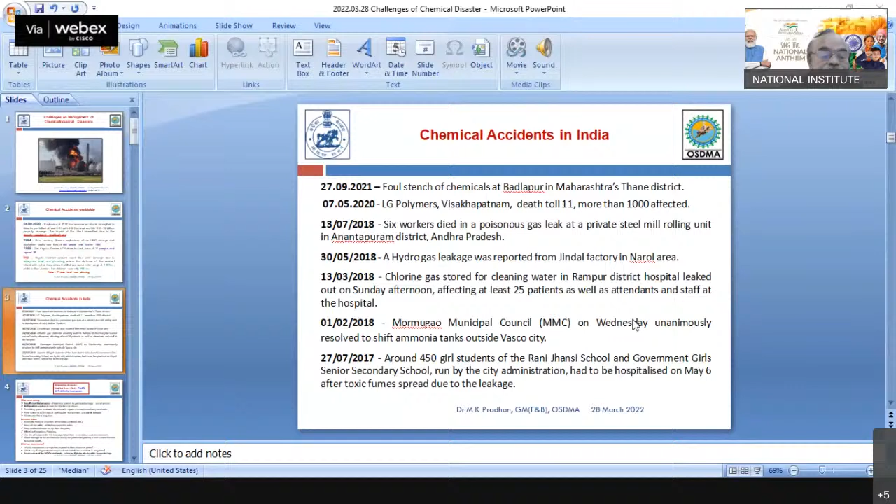So, sir, my presentation is visible, sir? Yes, sir, it is visible. Yes, sir. Thank you. You can zoom it, sir. Zoom कर देना वो. This one. Sir, it is visible, sir. Hello, sir. Yes, sir. It is visible and audible. Sir, slides are moving, na? Slides are moving. Yes, sir. It is moving nicely. Thank you, thank you, thank you.

So let me start with the chemical accidents worldwide. On 4th of August 2020, there was a massive explosion of around 2,750 tons of ammonium nitrate stockpiled in Beirut port, which killed at least 181 with 6,000 injured, and 10 to 15 billion US dollars of property was damaged. The impact of the blast intensified due to the densely populated neighborhood. I underline the words densely populated neighborhood, which caused more damage to the people.

Now coming to two other statistics, in 1984, there was an explosion in San Juanico, Mexico, when an LPG storage and distribution facility took the lives of 500 people and injured 7,000. But in 1966, in a similar LPG disaster which took place in France, the lives lost were only 17 and injured were 80.

Now, let me draw a basic correlation between the two major incidents which have taken place during the last 35 years. One, the Bhopal gas tragedy, which took place in 1984. Another, I will speak about the Vizag gas leak, which took place in May 2020, so after 35 years. Now let us see what is the main cause of the Bhopal gas disaster.

I hope everybody is quite aware of this, but in short, insufficient maintenance. Protective systems to prevent discharge were out of service. The refrigeration system to cool the reactor was down. The scrubbing system to absorb the released vapor was not immediately available. The flare system to burn vapors getting past the scrubber was out of service and unattended for a long time.

And what are the lessons learned? That we must eliminate or reduce the inventory of hazardous material. The inventory of hazardous material should be kept as low as possible, but it should be sufficient so that there will be continuous manufacturing. But we should not stock much, because the more the quantity, the more the hazard.

Keep all safety related equipment in order. We must see at regular intervals, through plant safety audits and regular inspections, that all the safety gadgets which are inbuilt, mounted or fitted to the equipment are in order.

Keep residential areas away from the plant. Many times, in chemical industries, the people with their families stay very close to the industry. So in case of a major gas leakage, there is a likely chance that even the families will also be put to problems.

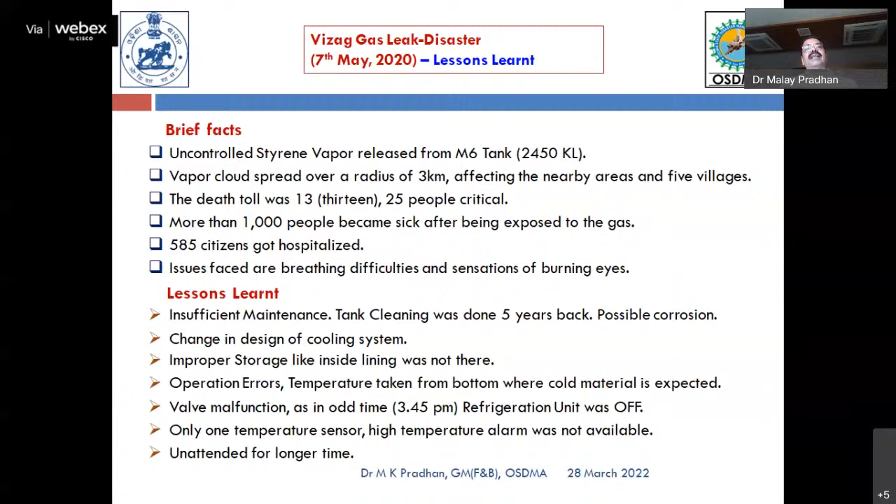Now, coming to the basic definitions, a chemical disaster is the unintentional release of one or more hazardous substances which could harm human health and the environment. So this is an unintentional release. Nobody wants it to be released, but it gets released of its own. And in the process, it can cause damage to human health and the environment.

Now coming to the chemical hazards. Chemical hazards are systems where chemical accidents could occur under certain circumstances. So it is the responsibility of the authority or the management of any chemical installation to identify the chemical hazards, meaning where in the system there is a chance of chemical accidents. And only after identification of the chemical hazards will the precautionary measures start flowing.

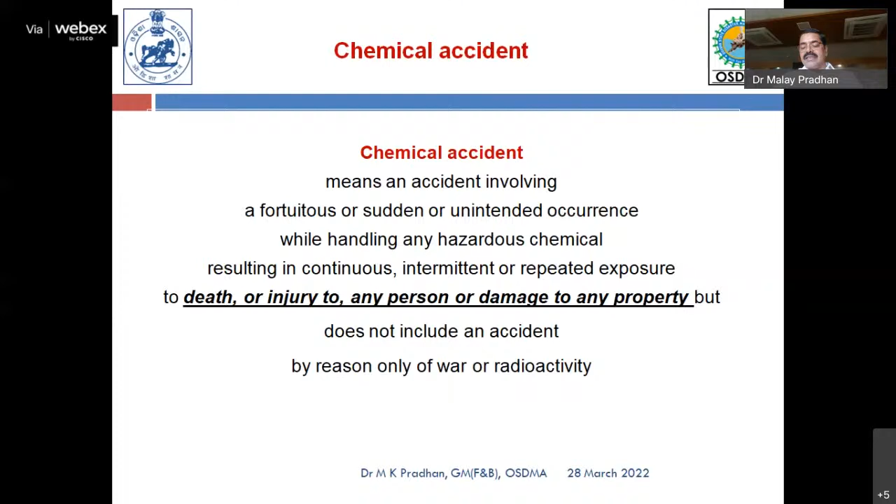Now, chemical accident. Chemical accident means an accident involving a fortuitous or sudden or unintended occurrence while handling any hazardous chemical, resulting in continuous, intermittent, or repeated exposure to death, injury to any person, or damage to any property. So, this is the basic definition of chemical accidents. Now, let us see how chemical accidents originate. These chemical accidents may originate in a manufacturing or formulation facility, a facility where these chemicals are being manufactured or formulated.

Formulated means one or more chemicals mixed in a certain proportion and converted into a different proportion, or used in a manufacturing process where hazardous chemicals are used as raw material. This is called a manufacturing or formulation facility.

During the process of operation, at any stage of the product cycle - even storing the hazardous chemical, pumping it from the storage point to the system through pipelines, and using the chemicals in processes - there is a chance of leakage because things are moving at speed and at a pressure more than atmospheric pressure. In case of leakage, it has a hazardous effect and can cause injury.

Another factor is material handling. This may be inside the plant or outside. Material handling from one point to another can also lead to problems.

Then there is transportation of hazardous chemicals, HAZChem. This transportation is very vital, and it can be on road, rail, air, water, or underground pipelines. As you see on the national highway, you might see a lot of LPG tankers, petrol, diesel, butane, and propane tankers moving.

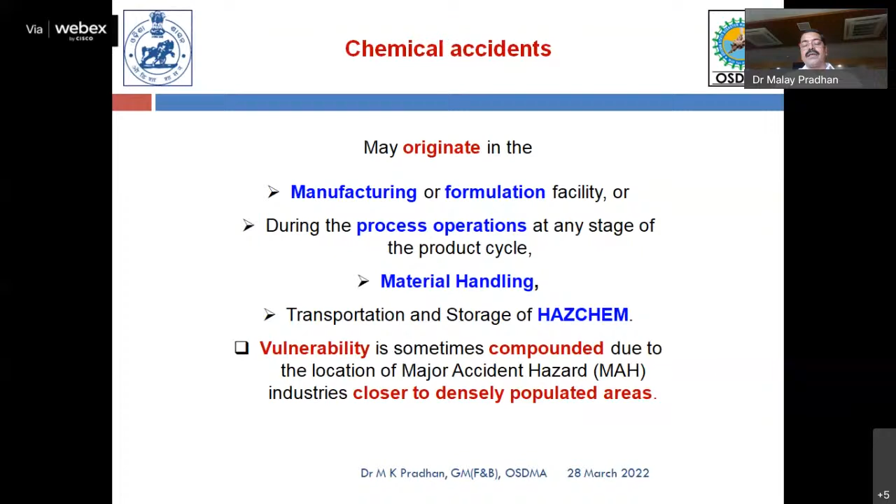The causative factors of chemical accidents can be in the shape of a fire, an explosion, a toxic release like ammonia or chlorine poisoning, or CO poisoning in blast furnaces or sponge iron plants. There can also be a combination of these - sometimes a toxic release can lead to a fire, or a fire can lead to an explosion, and cascading effects are also possible, where in one industry fire can spread across different zones, or fire from one industry can travel to other industries.

There are certain technical errors, such as design fatigue and corrosion, and human errors like procedure deviation. Many people who are at the helm of affairs, who are required to do the job, sometimes make procedural deviations, neglect safety instructions, or lack information. Organizational errors, like poor emergency planning, also sometimes lead to problems.

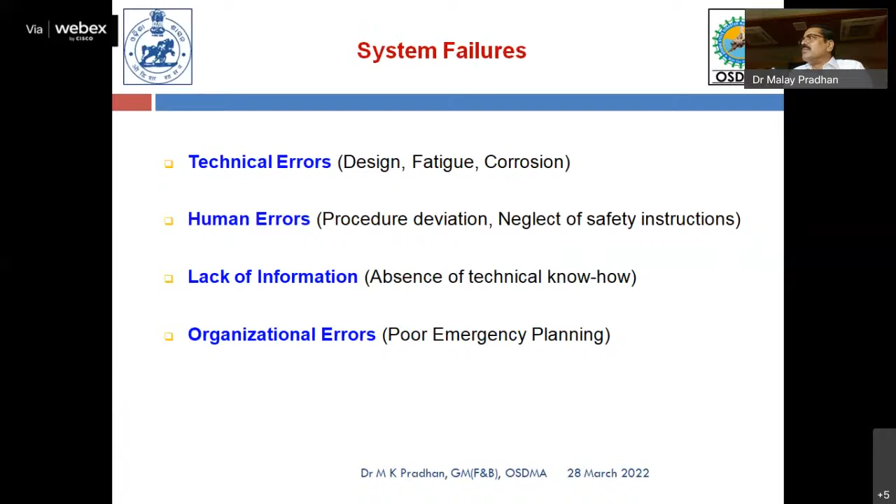The compounding effects of chemical accidents: the intensity becomes greater depending on wind speed and direction. Depending on the wind direction, the vulnerability zone will increase - instead of an entire circle, only a sector will be affected depending on wind direction and speed.

Then the rate of precipitation, toxicity, or the quantity of chemical released is also very important, as is the population in the reach of the release - how many people are available in that reach. Dense population creates more problems, along with the probability of formation of a lethal mixture and other industrial activity being performed in closer vicinity.

So a cascading effect can also take place. Now coming to disaster risk reduction, DRR. It is defined as the concept and practice of reducing disaster risks through systematic efforts to analyze and manage the causal factors of disaster through reduced exposure to hazards.

Once we identify the hazards, we will try to see that the exposure to the hazard is reduced. Less and less people will be exposed to the hazards. We will give some barriers or isolate the system from the main source so that fewer people will be exposed to this. This is one of the systems.

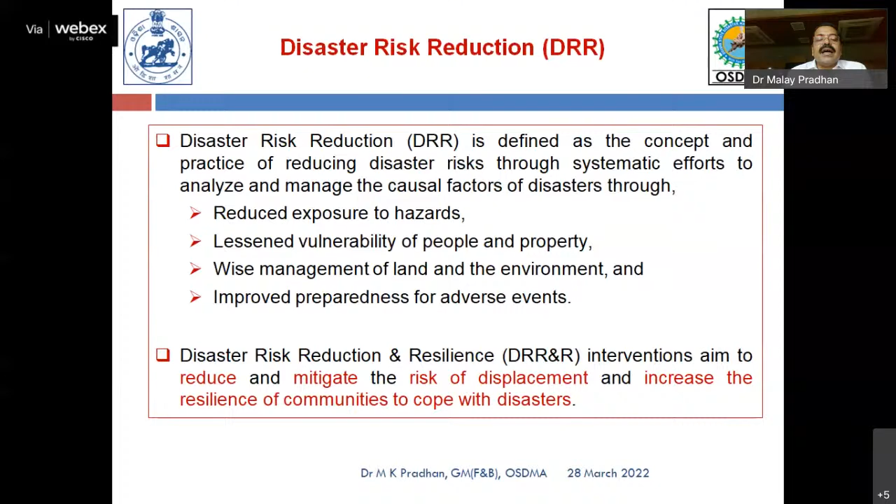So in a coastal area, even if industries are there, we must understand that because of cyclones, the wind speed can go up to 200 km/h. So whatever building structures, chimneys, or high-rise structures are available in the factories, we must ensure that the minimum resistance of the structures is more than the maximum permissible wind velocity at that particular point over the last 10 or 20 years. Then we can say that the structures or buildings are resilient.

The next point is a good warning system to save lives, prevent injuries, and mitigate losses. In cyclones, we can know the path maybe a minimum of 3, 4, 5 days or even a week before. We can know the path it is going to move and the maximum speed it can reach.

But coming to a chemical accident, suppose ammonia is being stored in one vessel or storage device. When it leaks, giving a warning becomes very difficult. So the intensity of chemical accidents is definitely more, but the frequency is less, and we hardly get any warning system.

The only warning system we must see is whatever the parameters, be it pressure, temperature, flow velocity, or thickness—corrosion, etc. We must have good sensitization systems so that when pressure is becoming more, a warning will come. Because in a chemical accident, we simply cannot allow it to happen. We must see that such accidents will not happen.

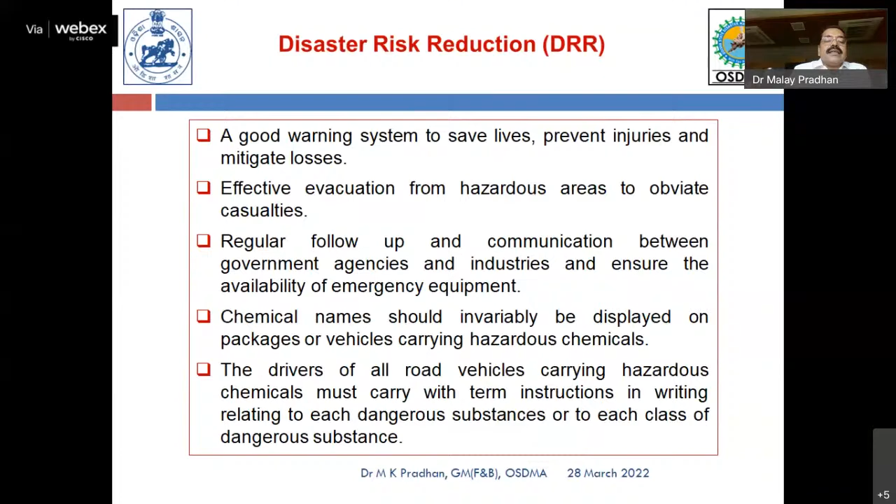Effective evacuation from hazardous areas, regular follow-up, and communication are all disaster risk reduction methodologies that are required. All relevant authorities at the local, regional, and national level should be fully prepared and have the proper equipment and training in place to deal with any accident scenario.

What we want to say is, suppose a factory is handling chlorine. Now suppose there is a leakage in chlorine—what exactly will they do? The management of the industry knows, because they have an on-site emergency plan and conduct mock drills. But what exactly the district administration will do, what the police will do, what the fire department will do, what the nearby locality will do—they require regular training and they must have the equipment. Now suppose a person has to be rescued from chlorine exposure.

They simply cannot go on their own. They have to have their aprons with oxygen masks, etc. available, so that they will not get trapped with that hazardous chemical. Otherwise, it will become very difficult. So we must understand what chemical is used, what its properties are, and what precautionary measures are to be taken. And in case of an emergency, what steps are also required to be taken.

So avoid housing near industries producing or processing hazardous chemicals, if possible. Participate in all capacity building programs organized by the government, voluntary organizations, or industrial units, and take part in preparing disaster management plans for the community, and identify safe shelters along with safe, easy access routes.

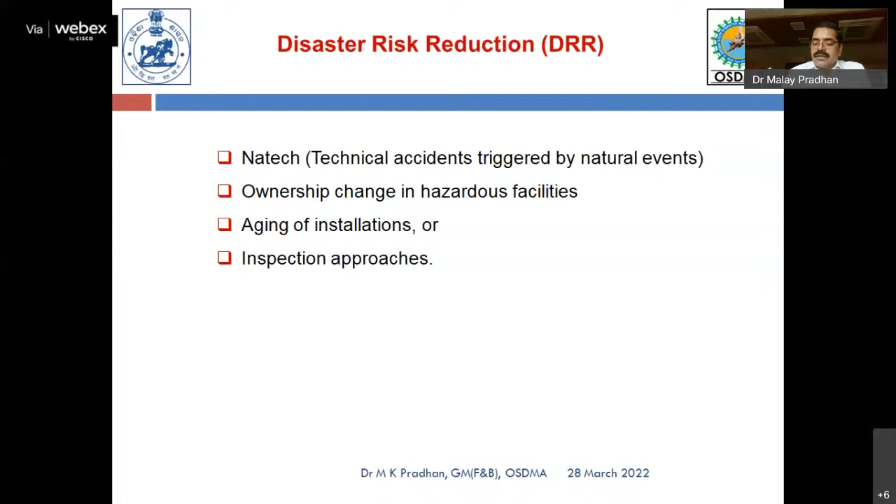Then the inspection approaches must also vary, particularly under CICG, the Centralized Inspection Core Group System. These inspection approaches exist particularly in Odisha. All MAH factories are required to be inspected at least twice a year, whereas hazardous factories are required to be inspected once a year, and non-hazardous factories once in 3 years. This indicates due care is given to the risk, and accordingly MAH units are inspected twice a year.

Now coming to the challenges. One challenge is lack of visibility. There are limited public databases on chemical accidents; statistics on deaths are recorded, but not on property or environment.

Lack of visibility means a chemical accident is very important, so how does it get the attention of people? It gets attention if it occurs at a magnitude like the Bhopal tragedy or the styrene gas incident in Vizag. But every day or every month, small or minor incidents happen which cause no injury to people or damage to the environment. These are not addressed, and no database is available.

If a database is not available, we are unable to take precautionary measures. In many cases, statistics on deaths are recorded, but not on property or environment. What environmental damage was caused? These things are not taken into consideration.

Now the latest principle is net zero. Globally, there is a program that by 2050 they will attain net zero. In India, the Prime Minister has already given an assurance that by 2070 India will be net zero compliant, meaning zero discharge, zero emission. Unless records are available, you cannot say which industry to focus your attention on, because there are a lot of industries all over India. Which industry should be addressed first? All this depends on the data.

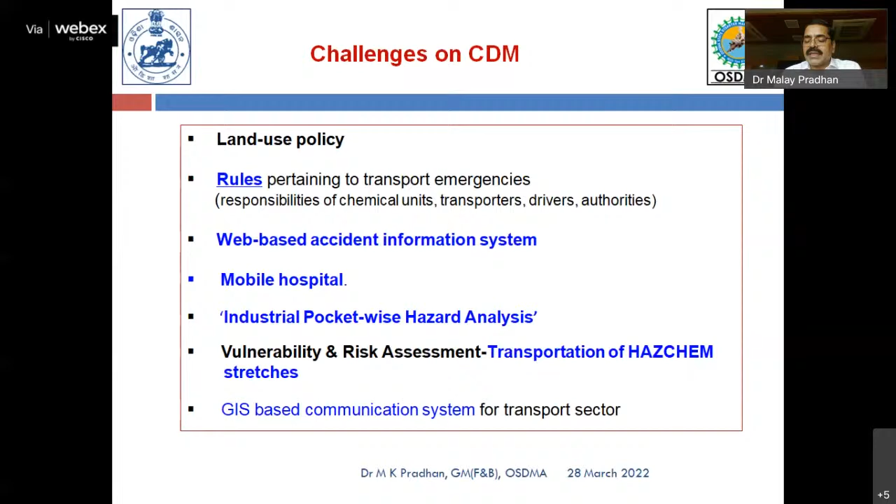GIS-based communication system for transport sectors. So these are certain challenges.

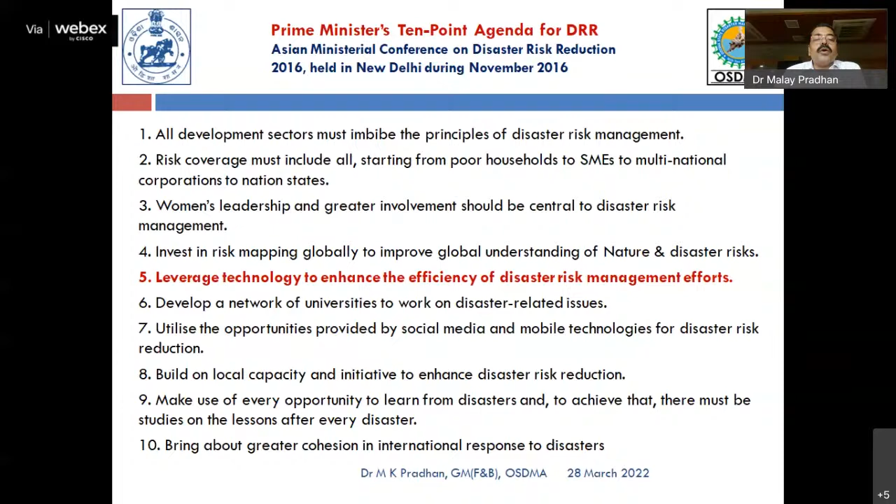Now coming to the Prime Minister's 10-point agenda for DRR, in the Asian Ministerial Conference on Disaster Risk Reduction 2016 held in New Delhi during November 2016, the fifth point is to leverage technology to enhance the efficiency of disaster risk management efforts. This webinar also highlights how technology can be utilized to enhance the efficiency of disaster risk management efforts. I will speak a little more on that.

The developments in access to data through Earth observation technology, street level imagery, connected devices, and volunteered geographical information are the new technologies. Unless we have first and foremost information on this, it becomes very difficult. For instance, in the state of Odisha, if somebody asks how much chlorine or ammonia is being handled in the state, I must immediately be in a position to answer.

If so, I must have data, district-wise, industry-wise: what is the maximum storage capacity, what is the inventory capacity, what is the real-time figure available now in factory X. If they are storing ammonia, how much quantity of ammonia is available today at this point of time. If this information is readily available with us, it becomes easy for the district administration or for the mutual aid team, so this is important.

Now, styrene gas leaked. At the time, we are only interested that yes, it leaked at this time, stopped at this time. What is the flow velocity? How much quantity of styrene gas was available? And what is the quantity it leaked?

Now, if all the data are available to us, then immediately with these modeling methods, we can know the dispersion. From the dispersion modeling, we can know the traveling distance, and we can give an alert and a warning system to the people nearby that this much quantity of gas has leaked with this velocity. This is the sectoral area that is going to be affected, and immediately the evacuation team will try to rescue these people, and other people will not be allowed to go to that area. So it becomes a very specific and pointed approach for disaster management.

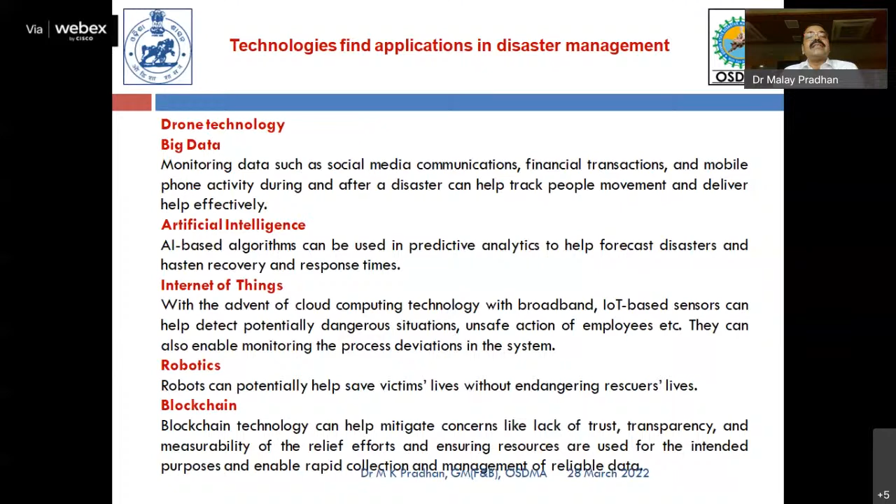So last, I want to say, failure to prepare is preparing to fail.

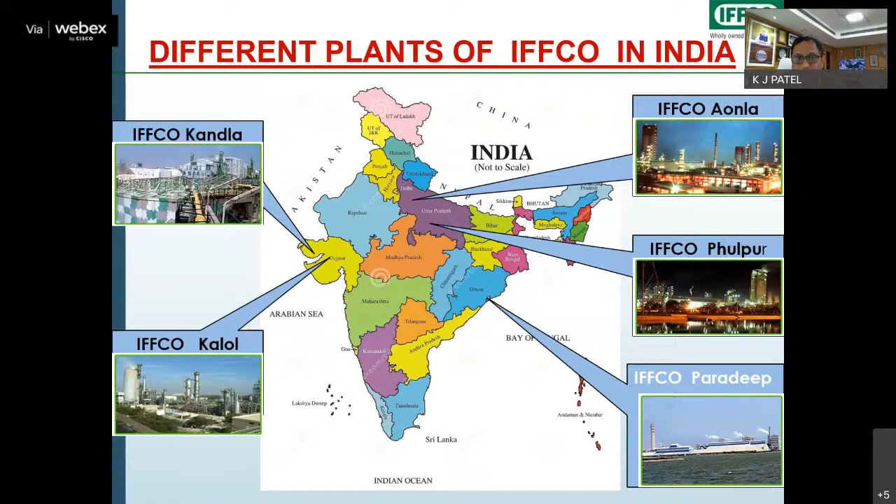So we have 5 units across the country, 2 in Gujarat, 2 in Uttar Pradesh, and 1 here where I am heading, in Odisha, the Paradeep unit. The Paradeep unit is the world's largest fertilizer complex, where we have the phosphoric acid plant of 2650 tons of capacity, which is the basic input for the production of phosphatic fertilizers.

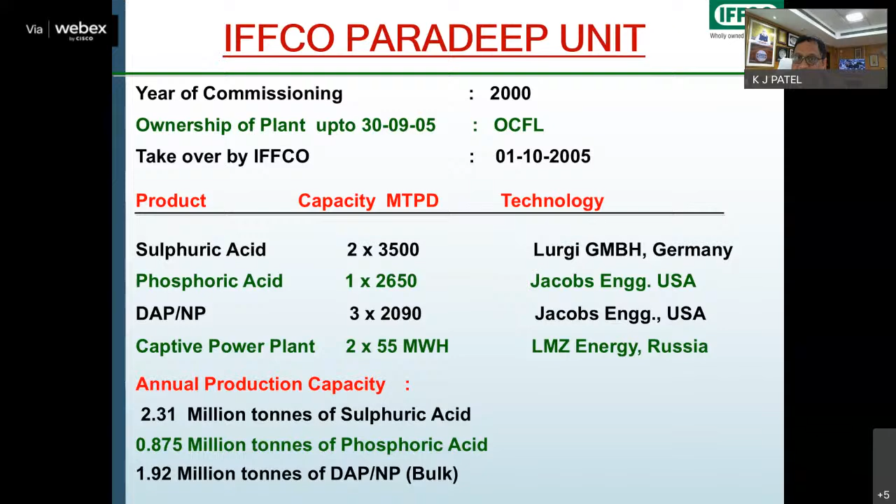Just to brief, sulfur is used to produce sulfuric acid. We are operating an integrated acid cum fertilizer manufacturing complex, where we produce sulfuric acid by burning sulfur. We produce phosphoric acid by reacting rock phosphate with sulfuric acid, and ultimately phosphoric acid, sulfuric acid, and ammonia all together produce DAP and NP. And in case of NPK, we add muriate of potash in the DAP plants, and ultimately the required fertilizers are produced. So in the process of DAP, NP, and NPK, we require ammonia to be reacted with phosphoric acid, so that ultimately the ammonia-based fertilizers are produced in our plants.

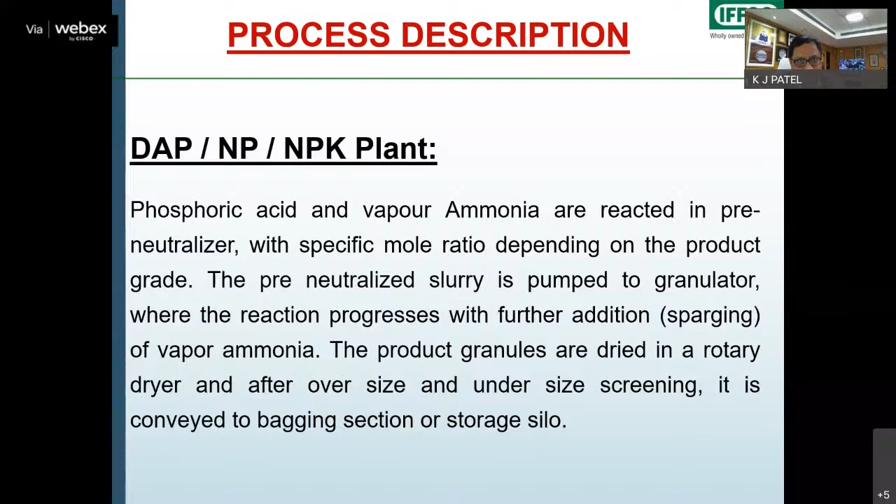As far as the raw material inventory is concerned, the major one is ammonia, where in a year we are consuming about 400,000 metric tons, and this is being imported from various countries. Out of 4 lakh metric tons, 3 lakh metric tons we used to import from Russia and Ukraine. And unfortunately, because of the Ukraine and Russia war and the force majeure, this has now stopped, and it's going to be a challenge for not only IFFCO, but the entire fertilizer community in the country, how to manage the availability of ammonia to produce the fertilizers.

Disasters have been very well explained by Dr. Pradhan, so I'll not go much into the details because the time is also very short. I will just proceed towards the issues and measures faced by the industries and where we can contribute to prevent disasters. 2 types of disasters are always present before us: natural disasters, caused by nature or by the act of God, and the other disasters which are not natural.

In case of the disasters which are because of natural calamities, maybe floods, tsunami, landslides, even cyclones, or sometimes lightning, we understand that these are the major challenges before the industries, and these need to be tackled.

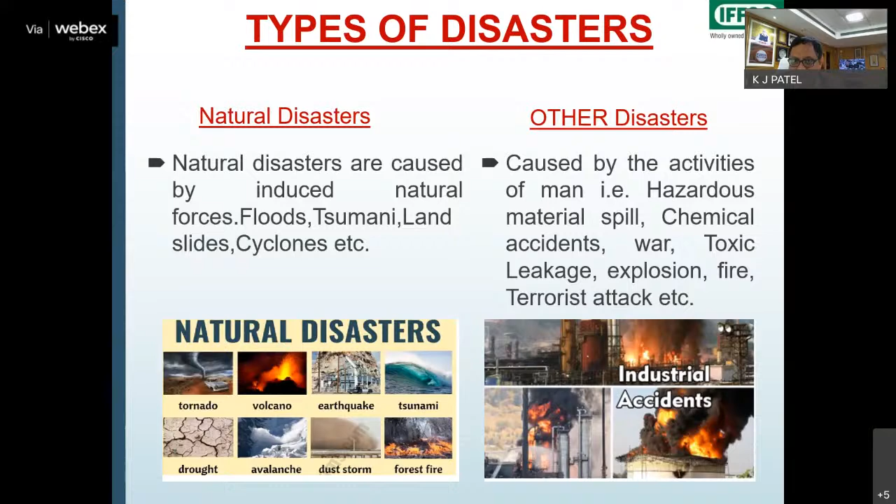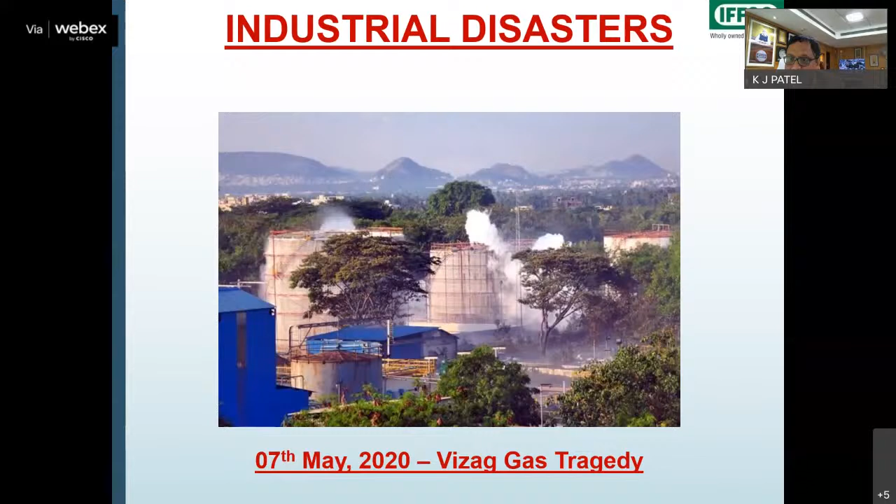A few disasters were already indicated by Dr. Pradhan in his speech. That was one of the worst tragedies in our country. On 2nd-3rd December night, 1984, the methyl isocyanate leakage in Bhopal's Union Carbide plant created a big tragedy for all of us. And very recently, on 7th of May 2020, at the Vizag plant, styrene gas was leaked and caused a lot of trouble to the population, including a few tragedies or fatalities.

When the disaster management cycle is read, it's always there that the response towards the disaster or recovery, and then mitigation and preparedness of the industry - here I'm always giving more thrust within IFFCO on how we are prepared so that the disaster should not occur, and if at all it takes place, then how to handle it.

If I talk about the chemical industry's overview for a country, it corresponds to about 3% of GDP contribution. 13 to 14% of the chemicals are being exported from the country, and we are also importing around 8 to 9% of the total imports in terms of chemicals.

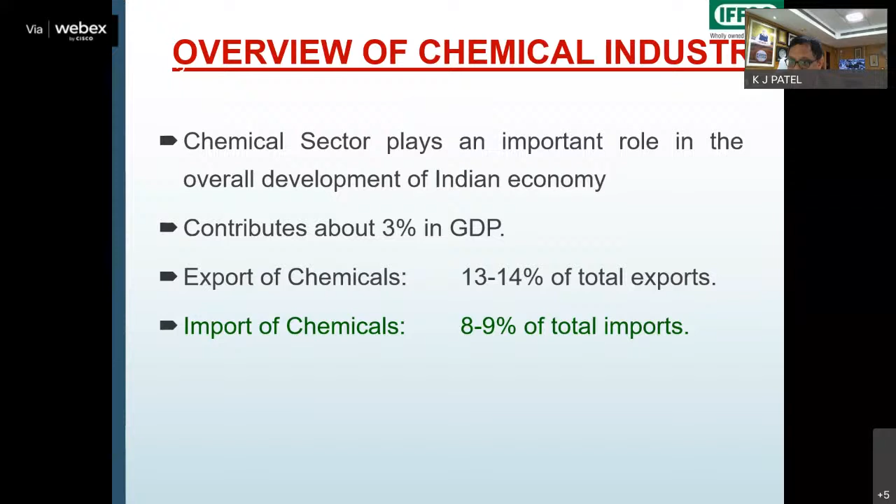The chemical disaster has already been discussed by Dr. Pradhan in detail, so I'll not go much into these details. But the one major point of this slide I wish to present before you is that the process and safety system - if that system fails, then obviously the resultant will be chemical disasters.

Natural calamities can also cause the disaster, which may lead to chemical disaster because of the storage of large quantities of chemicals. The technical and design errors.

These are the vulnerable things which need to be ensured, because if we look at the statistics of the disasters or major accidents which have taken place within the country or within the world, we find that technical design errors and human errors - the people who are responsible for handling those units, their capacity, competence, knowledge, experience, and if they commit errors - these two contribute the largest share in the disasters.

So I would like to inform you about the ammonia storage and handling facilities from the perspective of disaster management. First, let me introduce you to ammonia gas, because many of you may not be knowing about it.

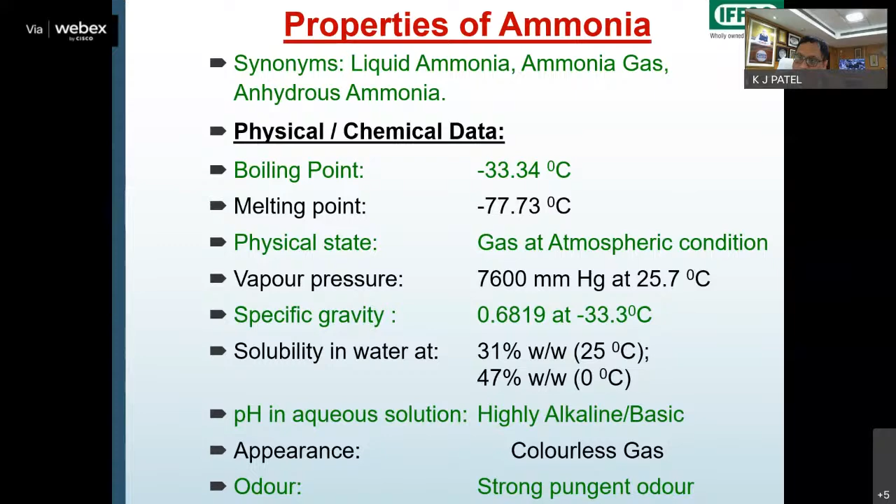Normally, we find that the explosivity of ammonia ranges from a lower to mid-upper 16 to 25% concentration, and only then is it in explosive conditions. Its corrosivity is very, very less. It's very friendly to metals, and that's a good part of ammonia.

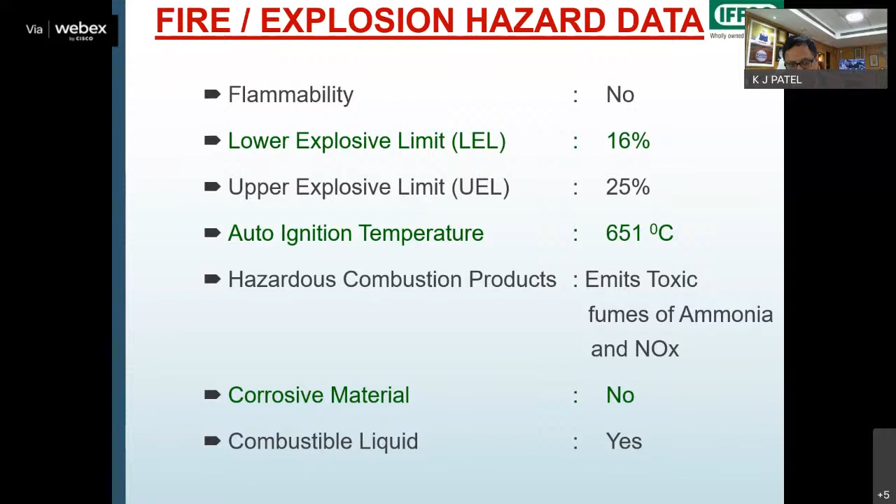The effects of ammonia, if a leakage takes place and it is within the range of 25 ppm, there is not at all an issue for the people working in and around the ammonia installations. But as soon as it crosses 35 ppm and up to 100 ppm, that's called the short-term exposure limit, and here we have to reduce the exposure of people working within the plant to less than 15 minutes. But when we cross the limits of ammonia presence beyond 100 up to 5,000 ppm, there are various effects on humans as well as animals.

This can lead to a major concern for the population or for residents who are within the township of the plant, or maybe the nearby villages, where the effects of ammonia will be very dangerous.

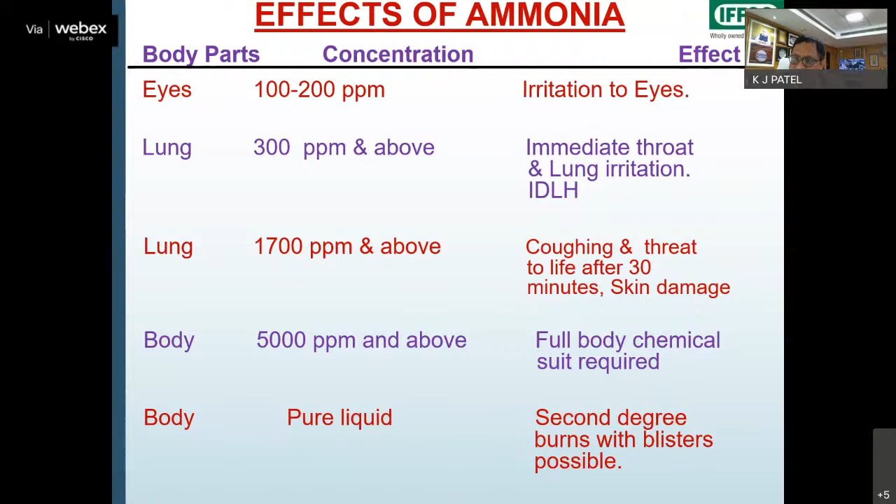The hazard control methodologies are already discussed, but let me tell you that elimination of the hazard is the best way of coming out of possible disasters.

Very recently, IFFCO has come out with one very innovative product called nanotechnology-based fertilizer. It has already started producing nano urea, which is also ammonia-based fertilizer, and we are also going to have nano-based DAP. Nano DAP fertilizer is going to be manufactured in the country very soon. We have already installed one plant of nano urea manufacturing 2 lakh liters of bottles in a single plant.

The consumption or requirement of ammonia goes down extensively if we have the nano-based fertilizer production technologies. This is where the nano liquid fertilizers reduce the requirement of ammonia.

If I take a case of ammonia requirement at IFFCO's Paradip unit, we are going to have one nano DAP plant here itself, producing 2 lakh liters of nano DAP. The requirement will be for 10,000 tons of production of DAP fertilizer at IFFCO Paradip, we need about 1,500 tons of ammonia every day.

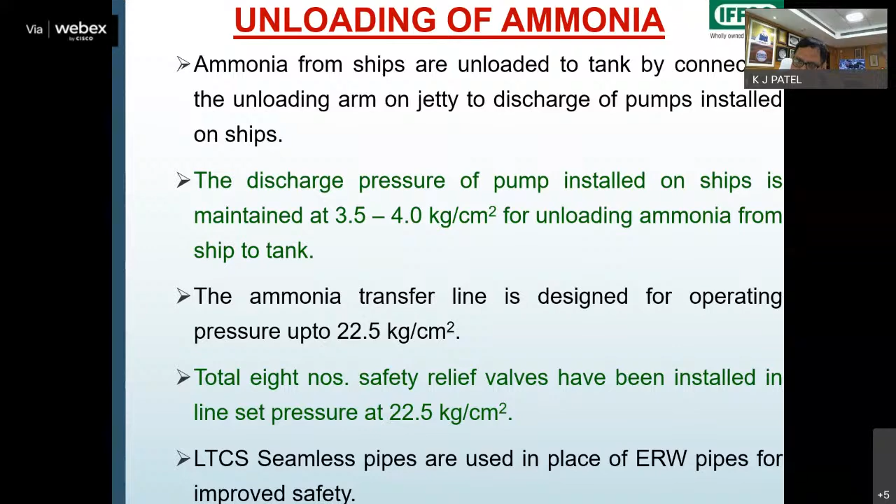These ammonia ships are unloaded at our berth, the jetty, and from there it is transported to the plant through pipelines. These pipelines are designed for a pressure of 22.5 kg per cm square, but we never allow the discharge pressure of the pumps more than 4 kg per cm square, which corresponds to unloading nearly 1,000 tons per hour of ammonia from the vessel to our storage tanks.

These are the pipelines used for transporting ammonia from the jetty to the plant. The important requirement is that pipelines constructed for handling ammonia are all low temperature carbon steel pipelines, fit for operating even up to minus 45 degrees Celsius, as against ammonia being handled at minus 33 degrees Celsius.

These pipelines are very well insulated so that heat ingress into the pipelines, which may lead to a possible rise in pressure, is prevented. The cold insulation over the pipelines is also a very important requirement, and these insulations are monitored using thermal imaging systems to ensure the installations are well in place and good enough to handle heat ingress.

The surface temperature over the insulated pipelines is measured at regular intervals. Pressure relief valves and other devices, including flexibility analysis of the loops or pipelines used for transporting ammonia, are very critical requirements, and these are being ensured by the installations in our industry.

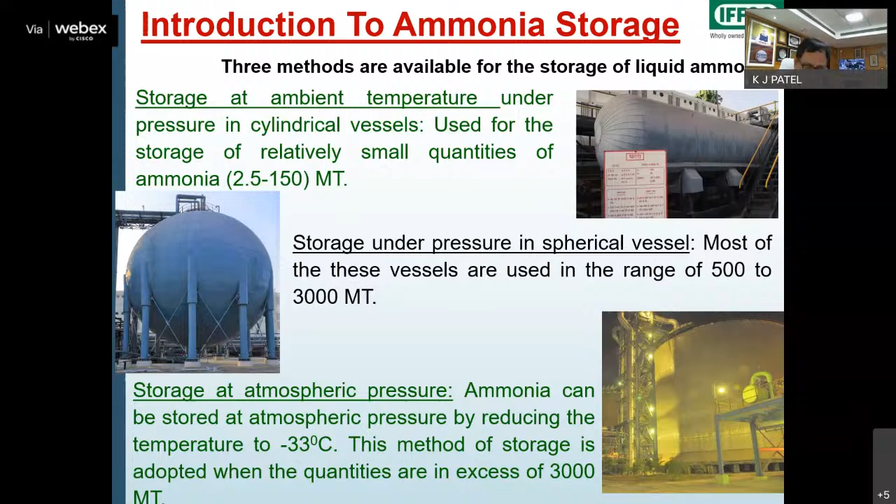The atmospheric storage of ammonia is the most popular and most user-friendly, as well as from the disaster perspective. These are the least prone to disasters. For that reason, the storage of ammonia at atmospheric pressure is preferred, and that is normally found throughout the entire world.

When it comes to the atmospheric storage of ammonia in tanks, the design features are available as per the American Petroleum Institute API 620, which defines various methods and available designs for tanks to store ammonia at minus 33 degrees Celsius.

There can be single wall tanks, where we have a single wall just to protect the ammonia from spilling out, because that tank wall will be designed in such a way that it will handle the entire quantity of ammonia as well as the internal pressures.

But if we have an external wall, this is a second design, where the outer wall will be utilized as a dike wall, and it will be used in case there is any collapse of the internal shell or internal tank—it can hold the entire quantity of ammonia. But it will be exposed from the top, and that will lead to increased vaporization and may create a problem for the population or the people handling it.

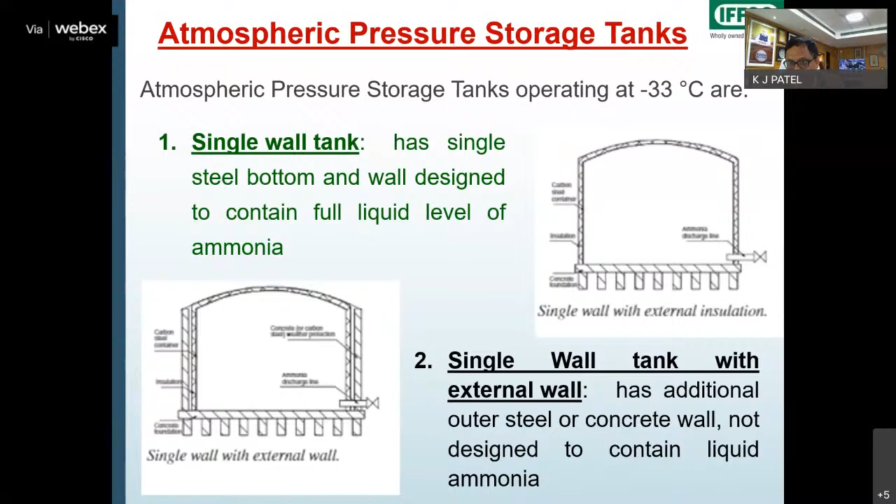Then there was another design developed as per API 620, with a concept of a double wall tank with a common roof so that it always remains covered. But here the outer tank shell was not made of LTCS, that's low temperature carbon steel, and that leads to a problem of cracking whenever the inner tank gets any leakage.

Then the idea came about utilizing perlite insulation in the annular space between the inner tank and the outer tank. If we see, the filling of perlite, a specialized insulation, will prevent the possibility of spillage or the increase or reduction in temperature of the outer shell wall.

And ultimately API 620 has, about two decades ago, come up with a technology that is a double wall, double integrity tank. So in our country, majority of the ammonia storage tanks—I won't say all, but majority—have been constructed according to the double wall, double integrity design concept.

In this design, the cup-in-tank will be holding the ammonia, and the outer shell will also be equally competent and designed to handle ammonia in case there is any failure or natural disaster, due to high pressurization or failure of technical systems. In that case also, it will be taken care of by the outer tank.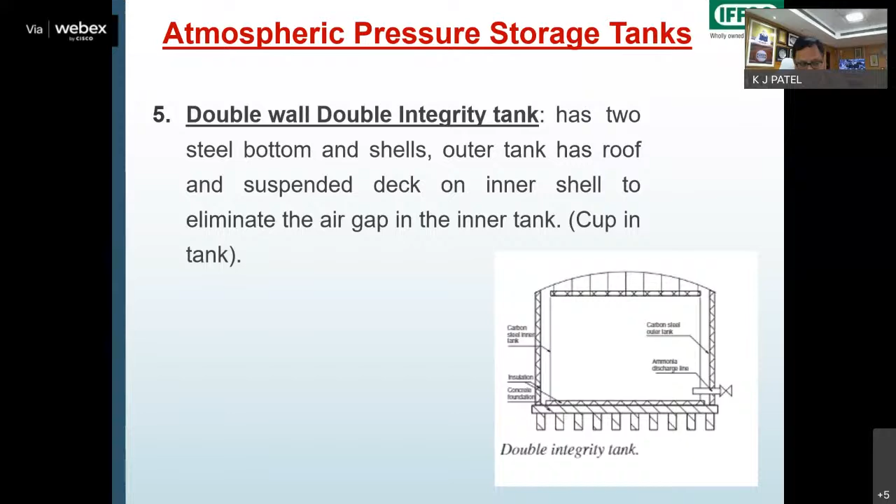We have 3 ammonia storage tanks at our site: 2 tanks of 20,000 tons each, and one of 10,000 metric tons. So the total 3 tanks hold ammonia, and the normal operating pressure we maintain is just 300 to 400 millimeters of water column.

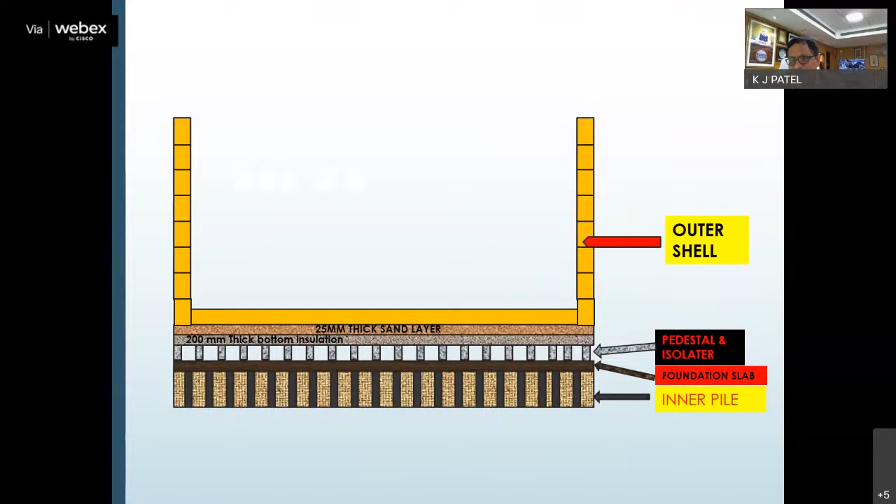This is a small video or animation about the construction of the ammonia storage tank which is in use at our unit.

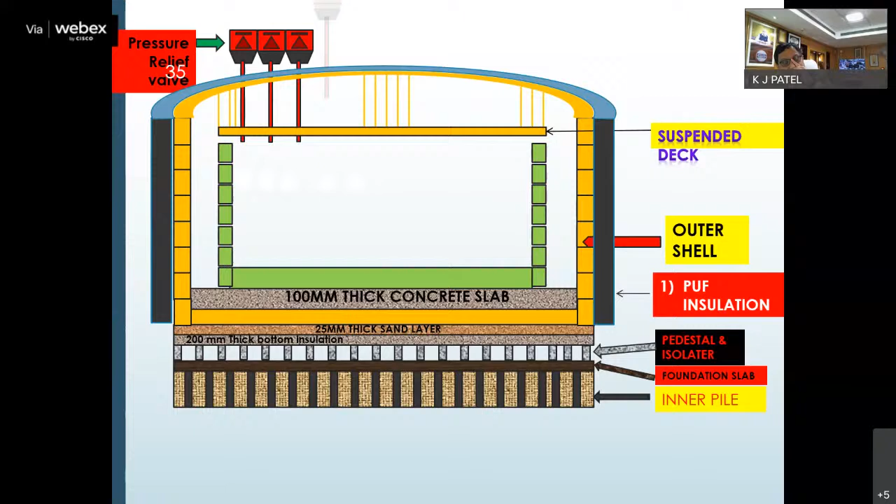So it contains pressure relieving devices. There are 5 relieving devices and 2 breather valves, in case there is a negative pressure, and when the ammonia gets filled up and the temperature increases, that is taken care of by the pressure relieving devices in case of excess pressure. But before the pressure relieving devices come into operation, there are continuously operating screw compressors which take the ammonia vapors and convert them into liquid and return it back to the tank.

I will explain about it. So the advantage of this double wall, double integrity design is that the inner and outer tanks are both competent and capable of holding as a secondary container. The outer tank works so there won't be any possibility of spillage of ammonia, even if the tank holding the ammonia gets any kind of leakage or collapse.

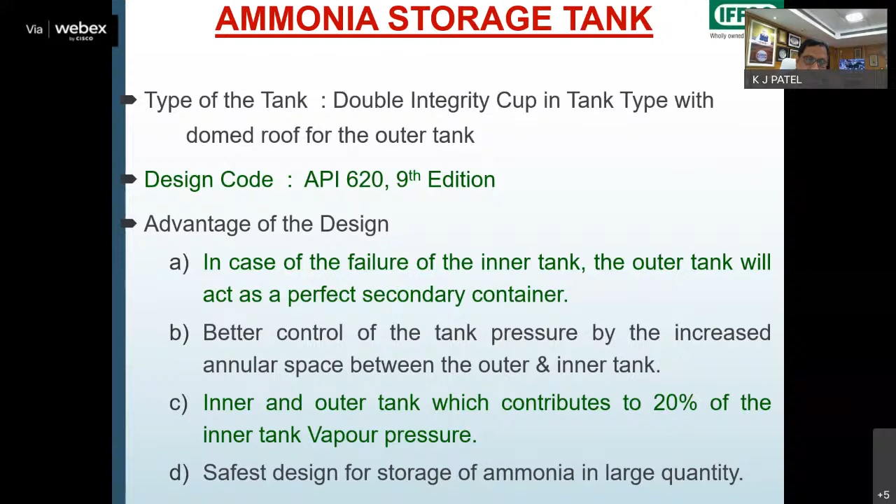There are several automation instrumentations, including level gauges and anchor straps. These anchor straps are provided to the inner tank, fixed with the bottom of the inner tank ring to the foundation, so there is no possibility of the inner tank lifting due to the buoyancy of ammonia if it enters the annular space. All instrumentation used is of high reliability and is verified at regular intervals for performance.

The safety valves are all pilot operated safety valves, which ensure that in case of over-pressurization—which can occur due to a system error or a problem with the ammonia vaporization handling compressors—the pilot operated safety valves will take care of the over-pressurization and divert the excess vapors generated in the tank to the flare stack.

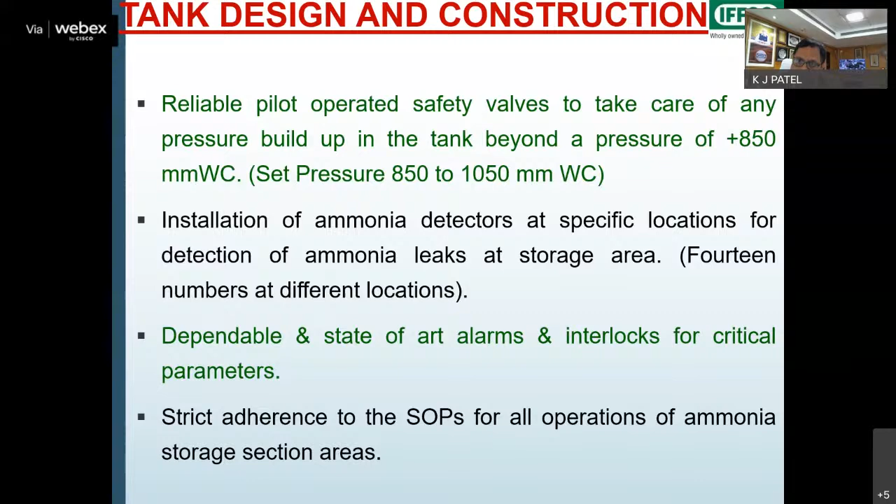There are dependable and state-of-the-art alarms and interlocks, as well as adherence to safe operating procedures. This is a very critical requirement, handled by qualified and experienced operators and engineers looking after the ammonia storage area.

There are three tiers of safety systems. The first is the refrigeration system, which takes care of the vaporization of ammonia happening within the tank. If the refrigeration system fails, the next tier is the pressure relieving devices, where we have high pressure relief valves which will relieve the pressure.

At times, to reduce or maintain the pressure inside the tank, we remove vapors using compressors. But if control of pressure is lost and a vacuum is created inside the tank—sometimes due to the refrigeration system or high outlet quantities of ammonia—the tank is designed for minus 50 millimeters of water column vacuum. If it goes beyond that, vacuum breather valves will open and ensure the vacuum inside the tank is maintained.

There is a dedicated flare stack 61 meters high. Ammonia is a very light gas and will always flow upward with the wind. So the 61 meter high dedicated flare stack is provided so that if the system fails and the pressure relieving devices start operating, the operator can open a flare stack discharge from the ammonia storage using the control room's access to the control valves, and the flare stack will light up, immediately reducing the pressure inside the tank.

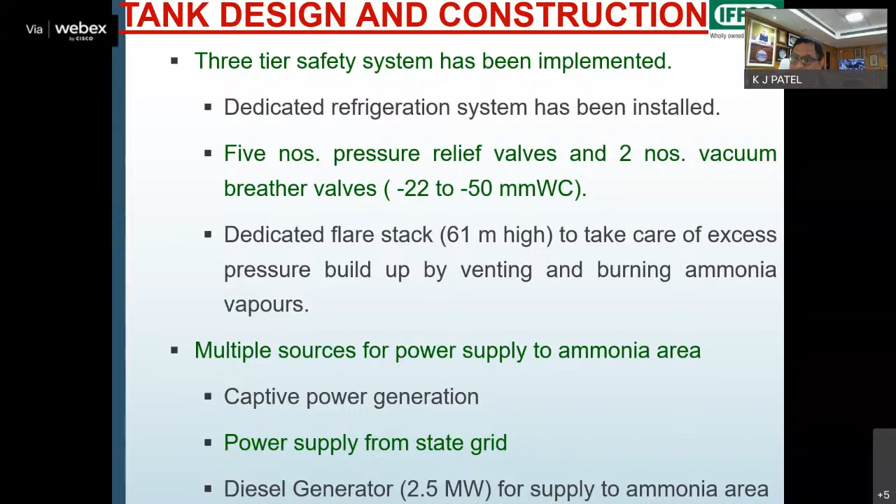Based on the design codes, the construction materials used for the construction of the ammonia tanks are very much taken care of at the time of construction.

The insulation over the tanks is also very specific. Nowadays, PUF insulation, which is formed in situ, is used rather than the polystyrene insulation blocks which were the practice in the past. This in-situ application of PUF insulation helps reduce the possibility of heat ingress, with better quality insulating layers.

The roof as well as the shell are both insulated. In the case of ammonia storage tanks, the roof of the inner tank and the outer tank roofs are insulated in some designs, while in other designs they are not insulated.

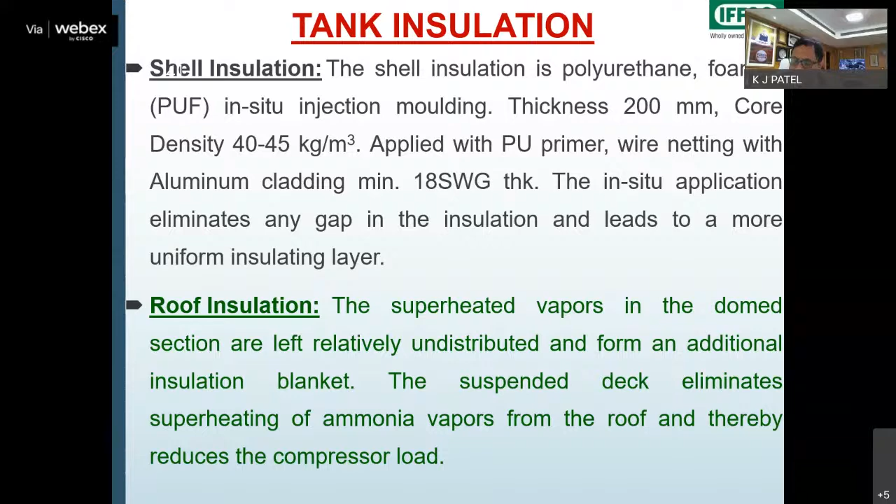There are suspended decks to cover the inner tanks, as well as various foam glass insulations below the inner tank, so that the coolness of the ammonia, stored at cryogenic temperature, does not get passed to the foundation, and the heat of the earth does not get transmitted to the ammonia storage tank shell. For that, vapor barriers are provided.

We have tanks constructed in the year 1999 and 2011. These tanks have been inspected once, and the tank commissioned in 1999 has been inspected once, while the tank commissioned in 2011 is yet to be inspected.

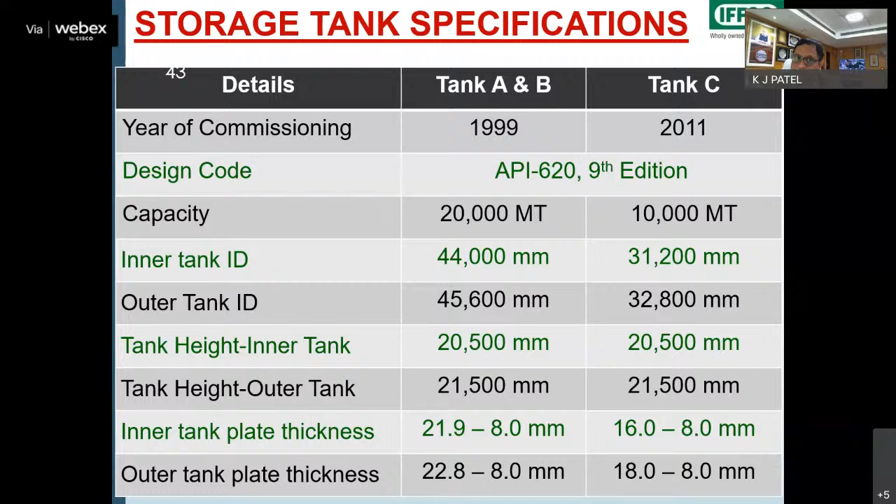I'll not go much into the details of the materials of construction, but one of the very important parameters is the wind velocity. The original concept of design was based on wind velocity conditions, because there are seismic conditions and wind velocity conditions at different locations in the country.

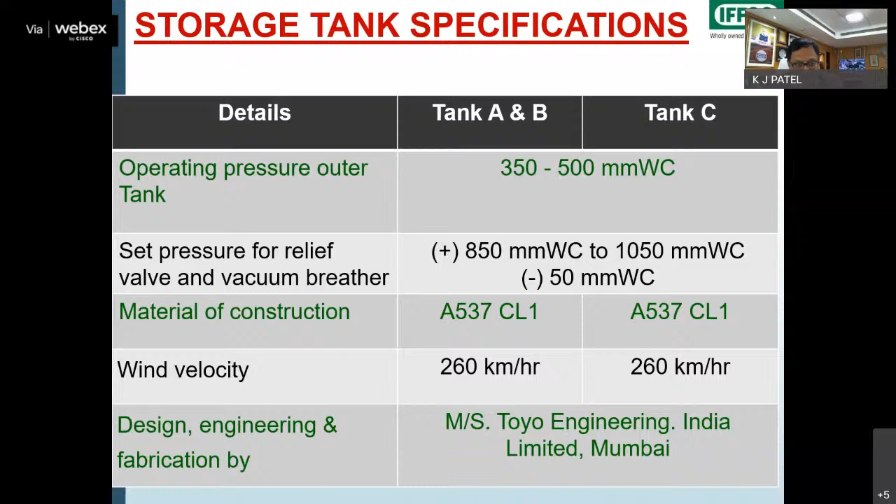According to that, the requirement of wind velocity considerations at the time of design was decided as per specific IS codes. However, at Paradeep, we experienced a wind velocity of 260 kilometers per hour during the 1999 cyclone. For that reason, whatever storage tanks are designed now, or those designed and installed in 2011 and 1999, have been verified for their suitability to withstand these wind loads.

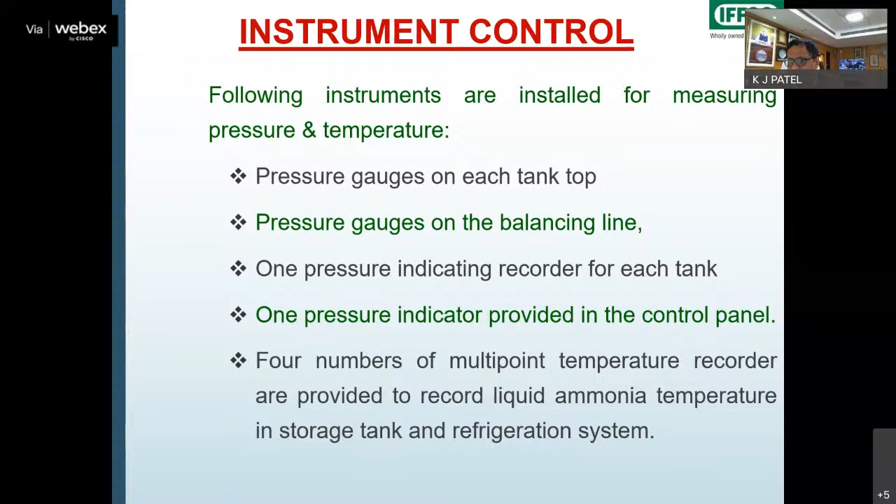There are various instrumentation controls, pressure transmitters, level measurement systems, and various temperature recorders and temperature indicating devices. All these pressure and temperature controls are managed in a control room where a distributed control system is available, which can be operated while sitting in the control room.

For the operation of the various screw compressors, the DCS system is capable of handling all the different screw compressors to take care of the generation of ammonia vapors within the tank. They are converted to liquid utilizing this refrigeration system using five numbers of ammonia screw compressors.

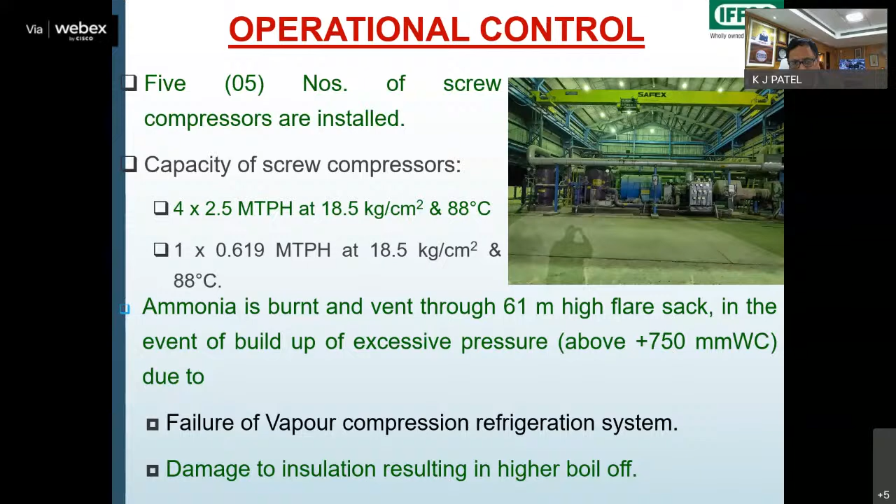In addition to this, safety relief valves are tested at regular intervals, which is very, very essential. For that reason, isolation valves are also available with every safety valve. The procedures for how to remove the safety valve, when to remove it, and how many can be removed at a time, are all very well documented and are to be adopted for conducting testing.

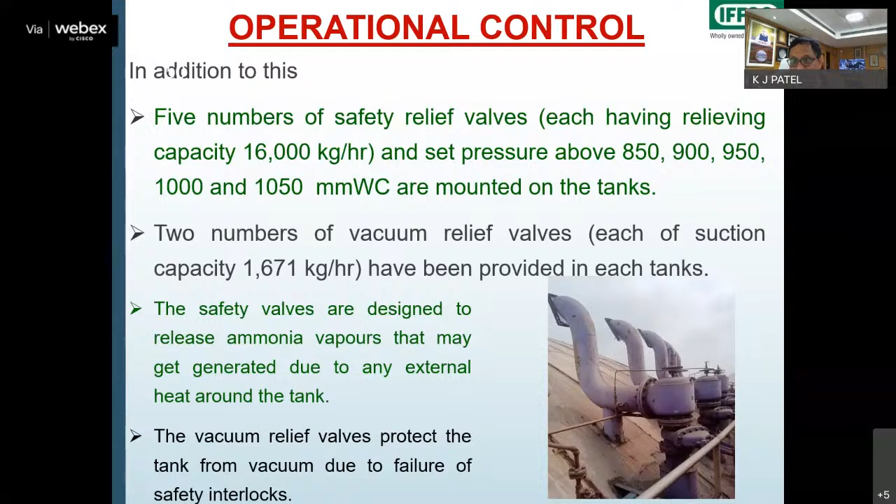Testing is conducted at regular intervals. Even the vacuum relief valves are tested under specific conditions where we are not adding risk if we remove them for the purpose of testing. So that's also one of the very important aspects which is to be taken care of.

There are various operational controls where the level inside the tanks is very crucial. Even a level can be generated in the outer tank because of any possible damage or discontinuity that might have occurred in the inner tank. So if there is a level of ammonia coming up into the outer tank in the annular space, that is also monitored very precisely with the level control systems.

There are various ammonia sensors placed at different locations in the plants so that whenever there is any possibility of a leakage, before it becomes a major leakage, the ammonia sensors located in the ammonia storage area as well as inside the plants where we handle ammonia give indications to the operators.

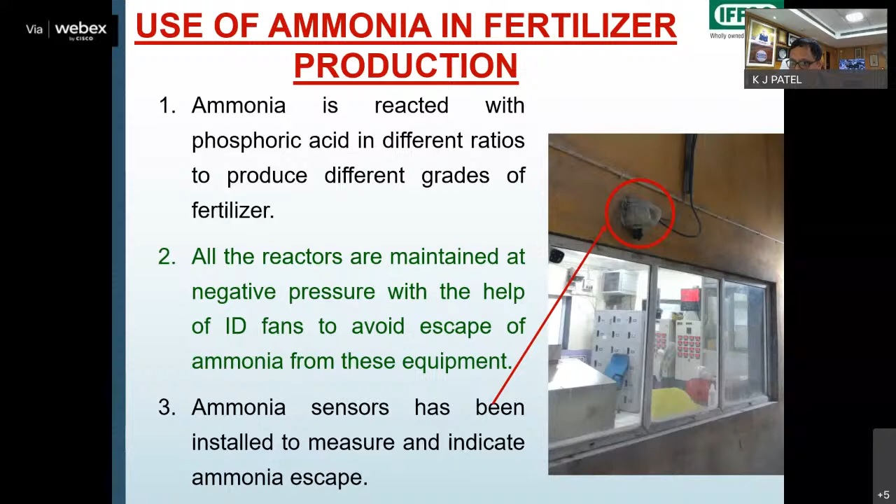There are various inspection strategies, and one of the major strategies nowadays is risk-based inspection, which is very essential. It is generally thought that more inspections executed for a device or system will generate more comfort level for operators, that the system is in place with required or adequate safety. But that is not true in the case of inspection of ammonia storage tanks.

This is a very vital parameter being considered, and the European Fertilizer Manufacturers Association has given guidelines for different countries, compiled by EFMA, which I'll share with you. This is because of the possibility of ingress of oxygen, which otherwise takes place with every inspection interval, whenever we decommission the tank and allow it to come into contact with atmospheric air.

Before that, it undergoes various decommissioning activities, including the purging with nitrogen and all. And ultimately, the tanks are made fit for conducting the test. But when we recommission the tanks, again, the procedure of purging the tanks to remove the entrapped air inside the tank and then gradually allowing the ammonia to be entered into the tank, and then it gets immediately converted to the vapor form. So it has to be initially pre-cooled. So all these procedures require utmost control of presence of air inside the tank.

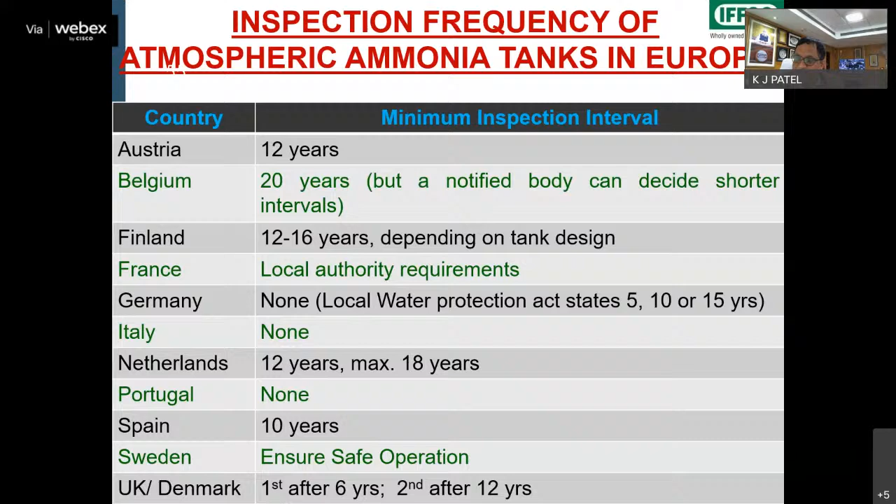So if we look at the intervals of ammonia tanks, again, this is a general guideline, not the specific statutory requirement in that country, but this has been compiled by the European Fertilizer Manufacturers Association, one of the PDF manuals available on the website, where different European countries follow their independent rules or advisories to conduct the tests or inspections of the ammonia storage installations. It varies from 12 to 20 years. At times, at some locations, it is 8 to 10 years also. So in our case, in fertilizer plants, we normally undertake the inspection of the storage tanks at an interval of 15 years.

But in case of installations like IFFCO, we have switched over to risk-based inspection, where we consider the entire cycles of operations of the tanks from the day of their commissioning. We also submit the documents which were prepared at the time of construction of the tanks, which materials were used, what were the welding procedure specifications, what were the procedure qualification records. So all the information, the cycles of operations, how many times the tanks have been depressurized or pressurized, how many times the ammonia has been loaded into the tank and consumed in the plant and reduced to a certain level, which might lead to a high amount of vapors inside the tank.

So all this data is kept available online with us, and this data is shared with the consultants who are providing the services of risk-based inspection systems. So when we decommission the tank, we make sure that the tank is subjected to proper NDT and various inspection methodologies.

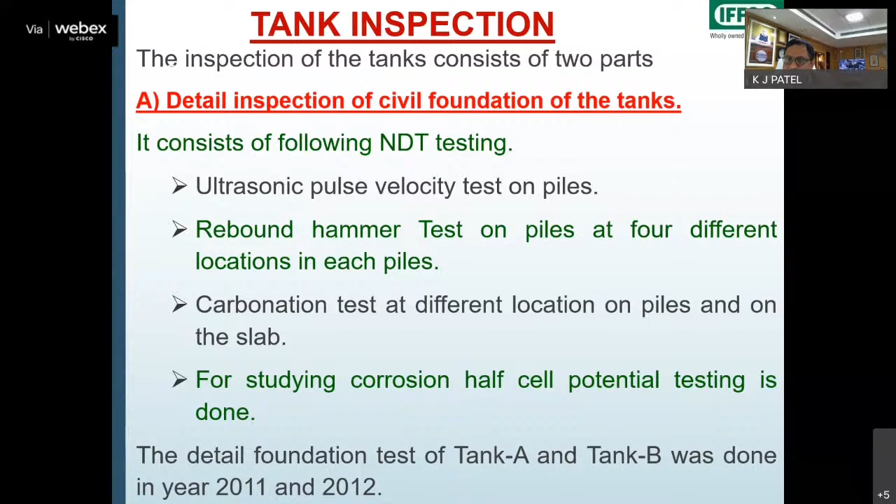So the tank inspection is very critical, and for that, not only the metallic shell, but the foundation of the tank, because we are handling the ammonia at cryogenic conditions. It's very, very essential for us. And for that, specific procedures or inspection requirements have been laid down, which are conducted at the time when the tanks are decommissioned and subjected to inspection. So these are all the inspection activities we normally conduct at the time of decommissioned status of the tank, or even at the time of recommissioning, how it is to be conducted. That's also very well documented.

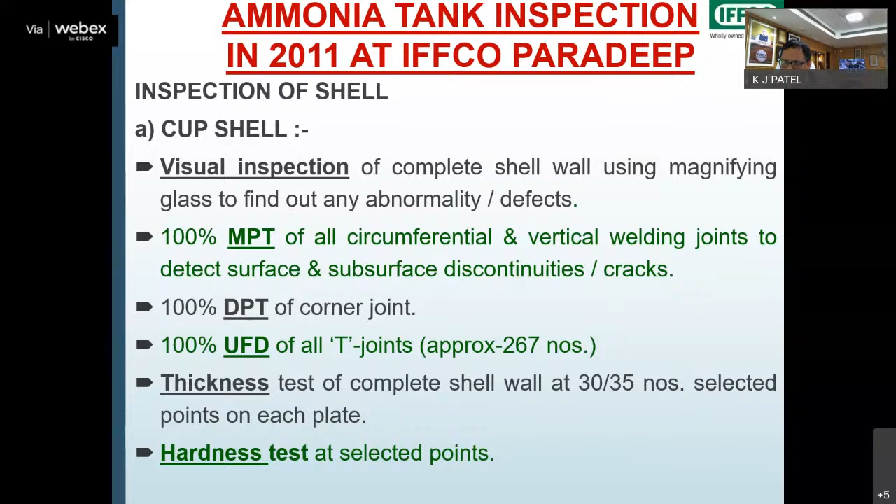So I had carried various photographs of conducting those visual examinations, magnetic particle testing, dye penetrant testing, ultrasonic flaw detection, hardness testing, microstructure examination, radiography tests. So all these tests are conducted on the tanks whenever they are available at appropriate intervals as per the risk-based inspection requirements. We carry out the inspections, for which normally NDT, non-destructive testing methods, are utilized.

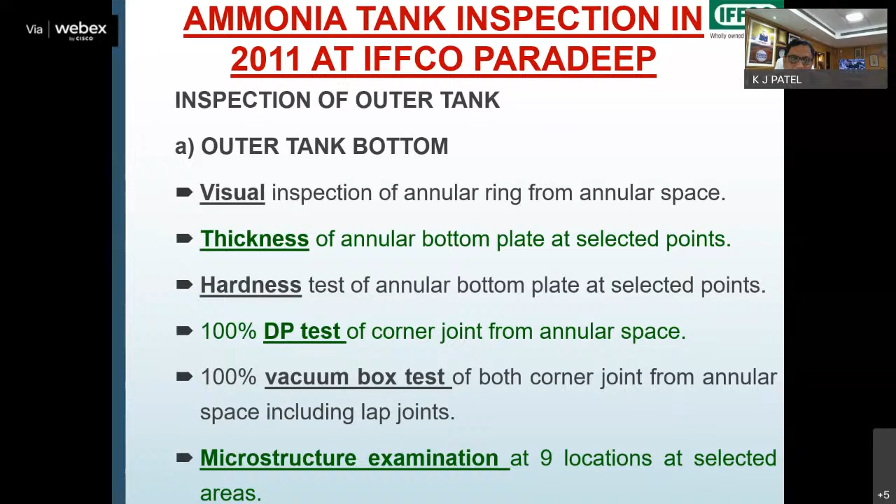There are many advanced and non-conventional methods, but they are available to the industries to utilize, like what was talked about by Dr. Singh from US also, and our Dr. Pradhan, that the latest or updated technology advancements, whatever are taking place in the world, they are to be utilized for the purpose of examination of our systems, integrity assessments of those systems.

And for that, there are various methods such as SLOFEC, LRUT, SRUT, pulse eddy current testing, low frequency electromagnetic testing. They are all available for the purpose of inspecting the pipelines or the storage tank bottoms, where only one side is accessible. So how to inspect them? Earlier, the vacuum box testing was the only method. Now we have LFET methods available, which can undertake inspection of the storage tank bottoms using automated devices which are operated with crawlers.

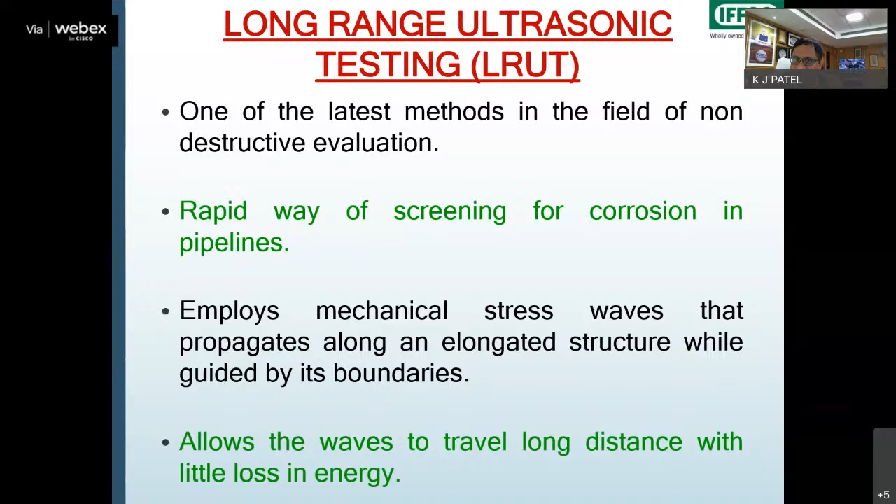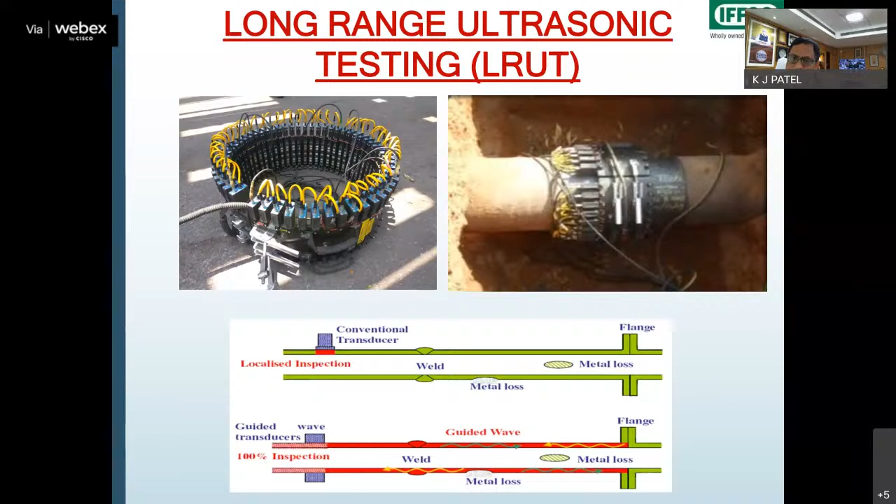So the long range ultrasonic testing, I think I have only 10 minutes, so I'll not go much into the details, but there are various methods of testing these pipelines. And this is one of the methods which we use, the long range ultrasonic testing, for conducting the testing of the ammonia carrying pipelines. So this is one of the installations, I think in the year 2016, we got it conducted for our ammonia carrying pipelines. There is some short range ultrasonic testing that's also done for the annular rings of the tank shells.

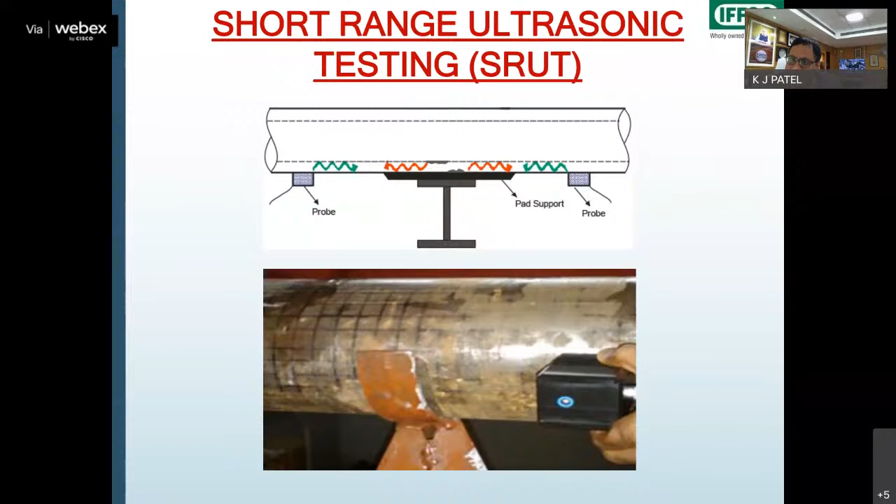Also for the pipings where we have the supports. Now these are very vulnerable locations. It's also very important for the industry to know what are the possible damages which can take place, and also how to identify those damages in advance. So the locations where the supports are provided to the pipelines are very vulnerable locations for possible damage and cracking. And for that reason, the short-range ultrasonic testing techniques utilizing the angle beam probes can help us to detect such defects which may be coming up into the systems.

There are pulse eddy current testing systems. These are used under the insulation, because normally the installations of ammonia are at cryogenic service, this is also true for LNG and all, where we have the insulating layers on top of the pipelines or on the tank. So how to inspect them without damaging that insulation? That is also one of the very critical requirements of technology.

These pulse eddy current testing systems are available now, where without damaging the insulation over the tank shell or onto the pipeline, we can conduct the examination of the pipeline metal, whether it has got any corrosion losses or not, or if there are any localized defects which might have developed because of any reasons.

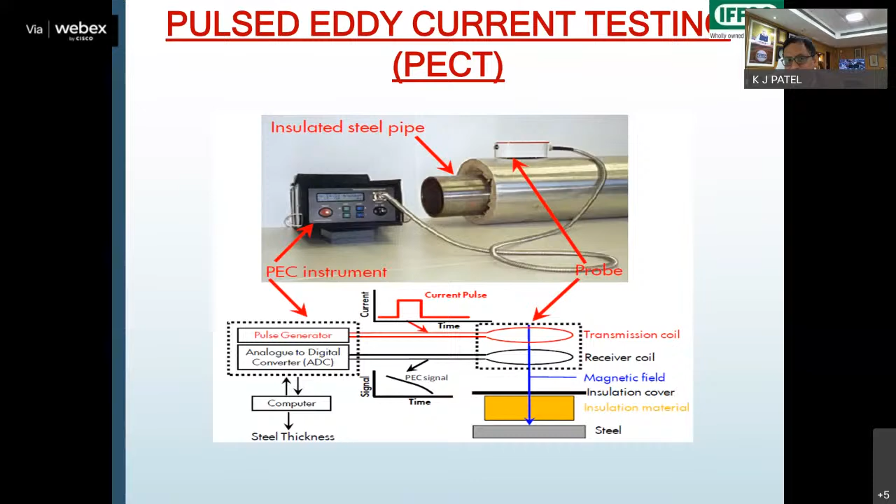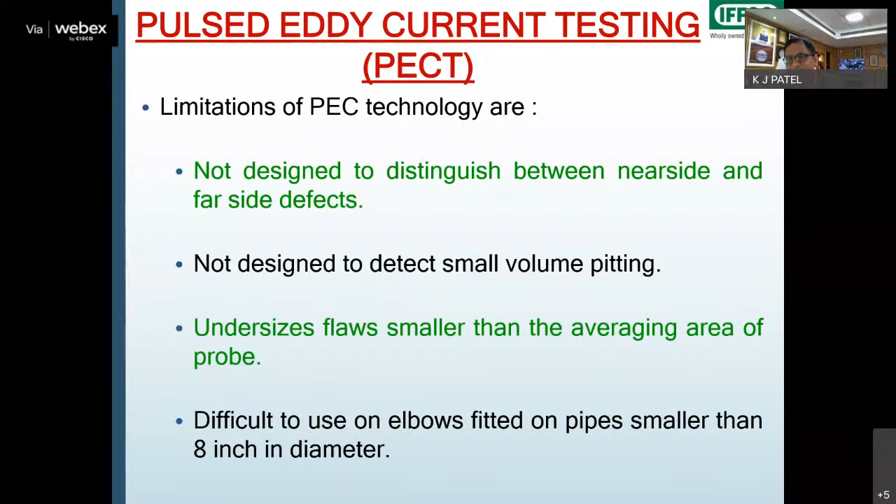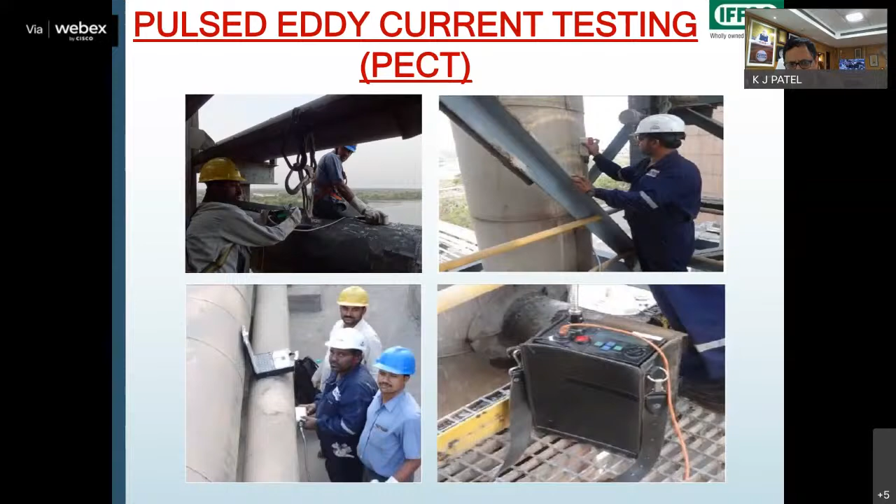There are pulse eddy current testing and other methods, so I'll not go much into the details, but these latest technology instrumentation now available are being implemented by the industries, not only IFFCO, but many industries now have switched over to utilizing such techniques for the purpose of inspection. So these are some of the pictures of our people conducting the pulse eddy current testing onto the pipelines. And there are the various results of those tests.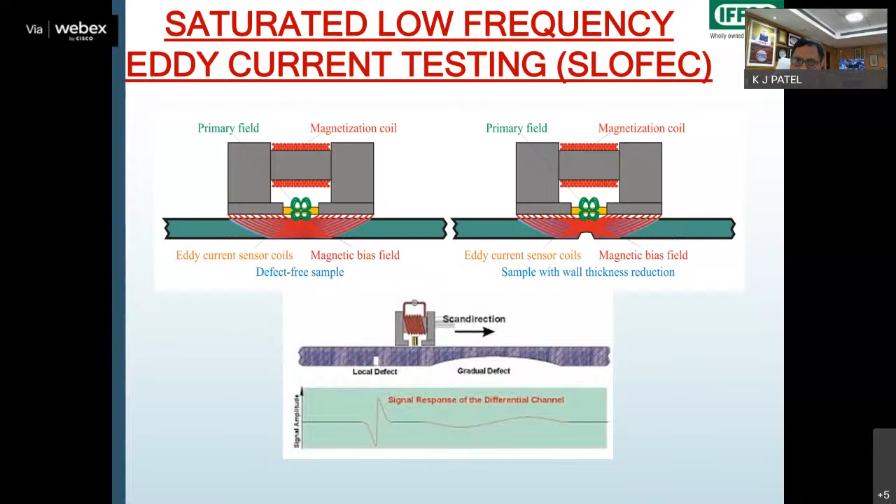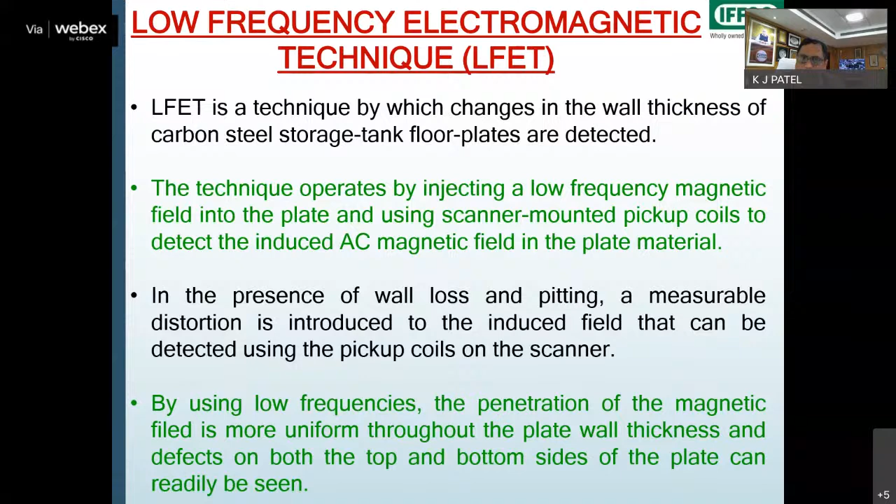Then there is saturated low frequency eddy current testing, which is normally done for the remaining wall thickness measurements. And this is also a very important technique, which is used for the floor scanning of the tanks. The other method is SLOFEC, and the second is LFET. These two methods are equally good and are suitable for conducting the tests on the floors or the tank bottom plates for the detection of any possible damages underneath. Surfaces exposed to the eyes can be very easily accessed and assessed, but those which are underneath can also be very easily examined utilizing these techniques.

Infrared thermography, as I told you before, is also very widely used, and nowadays we are utilizing drones equipped with thermal imaging sensors. And recently there is a very good change in the permissions on utilizing drones for industrial installations. So that has helped us a lot, and we are switching over to drone technology for conducting infrared thermography surveys of our installations.

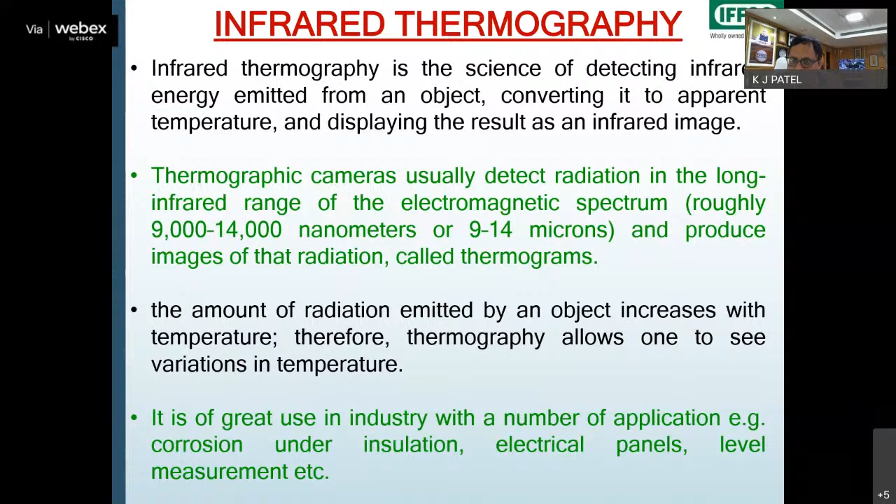So whenever we decommission the tank, or those tanks where we do not have the insulations from the outside, we can conduct the inspection utilizing robotic devices which move on the wall of the tank.

But very recently, this is a very, very special test. We have not yet utilized it, but we are planning and we are in discussions with one of the Denmark-based companies. It has inherent possibilities of risk, but still this is one of the best technologies, considered in Denmark, and they have started utilizing it in 1 or 2 installations.

So we are working with them on the robot-based inspection technique, where in the ammonia atmosphere inside the liquid ammonia, the robotic device can be immersed and it can go inside the tank. It will travel across the entire tank inner wall without any problem, and it will transmit the data on its integrity in terms of ultrasonic thickness values as well as the flaw detection values in case of weld joints.

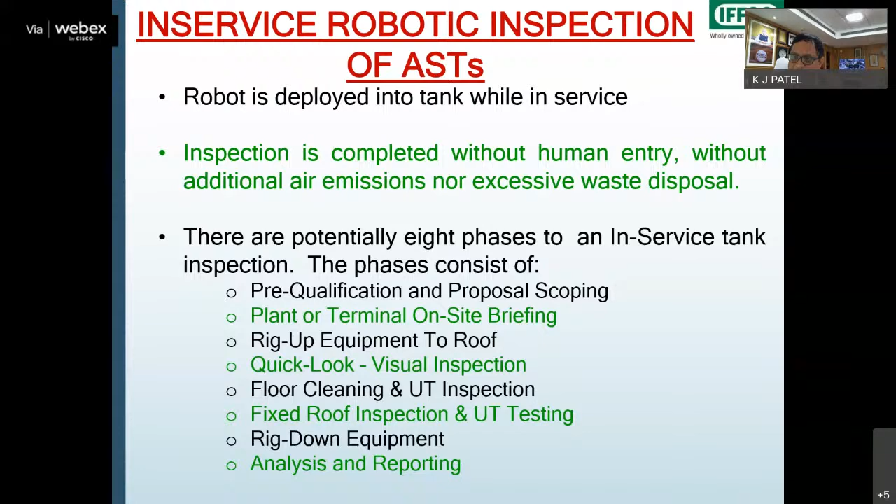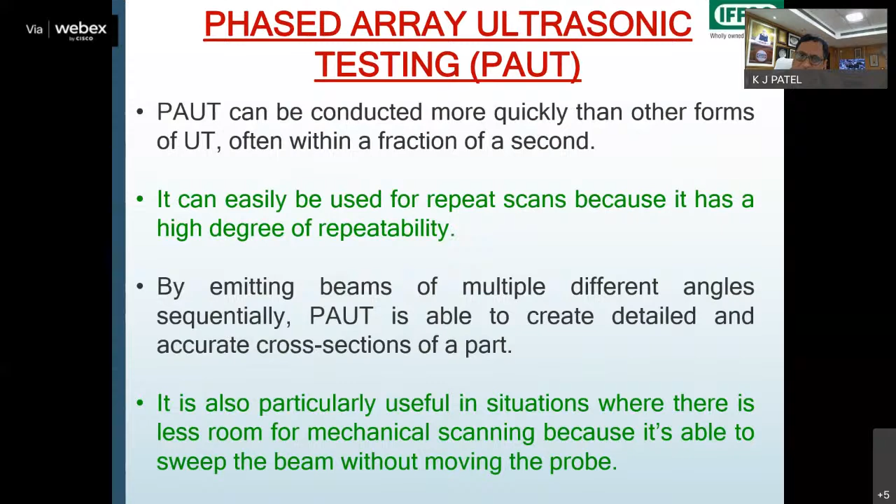And this data can be utilized to decide the integrity level of the tank when it is scanned utilizing these ASTs. This is the AST device. There are certain other techniques. There's a phased array ultrasonic technique. There's a time of flight diffraction technique. So all these techniques are very special and very latest, and these are being used in industries, not only for the ammonia storage tanks, but for high pressure pipelines and other ammonia pipeline services.

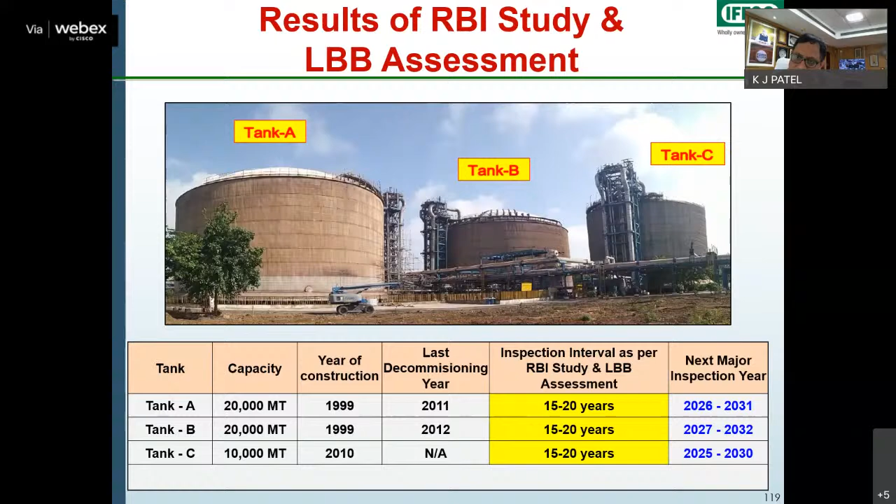We utilize these techniques. And this gives us the level of confidence in the equipment or the installations within the industry, because it's a responsibility of the industry that the knowledge of the equipment or knowledge of the fluid, whether it's a toxic fluid or flammable fluid, has to be available with the industry who is holding it, and we hold that responsibility of ensuring that these fluids are handled properly. The handling units are examined properly, assessed properly, their integrity assessments are done in a proper way so that the risk of any emergencies or disasters is reduced to the greatest extent possible.

For the emergency preparedness, there may be certain natural calamities or war-like situations where it may go beyond the capability of the industry to hold those leakages or those scenarios where the exposure of ammonia may reach other populations, or it goes beyond the on-site emergency control measures. So in that case, the preparedness of the industry is very, very essential.

And for that reason, I am very proud to say that in Odisha, for this off-site emergency plan, our disaster management authority in the state, as well as the Directorate of Factories and Boilers, jointly engaged the Disaster Management Institute, Bhopal, and they have worked out the off-site emergency plan for the district of Jagatsinghpur, where there are 9 major accident hazard units like us. They are situated in this district, and for that reason, we are the first to have this kind of disaster management risk assessment conducted for the district for the purpose of off-site emergency plans.

So we lie in the moderate risk zone 3 for the seismic zones. For the cyclonic zones, we are in the zone of 200 kilometers per hour wind speed, that's 55 meters per second. But we had experienced 260 kilometers per hour in the past. And for that reason, all our new installations, as well as the past installations, are examined or assessed for integrity to 260 kilometers per hour.

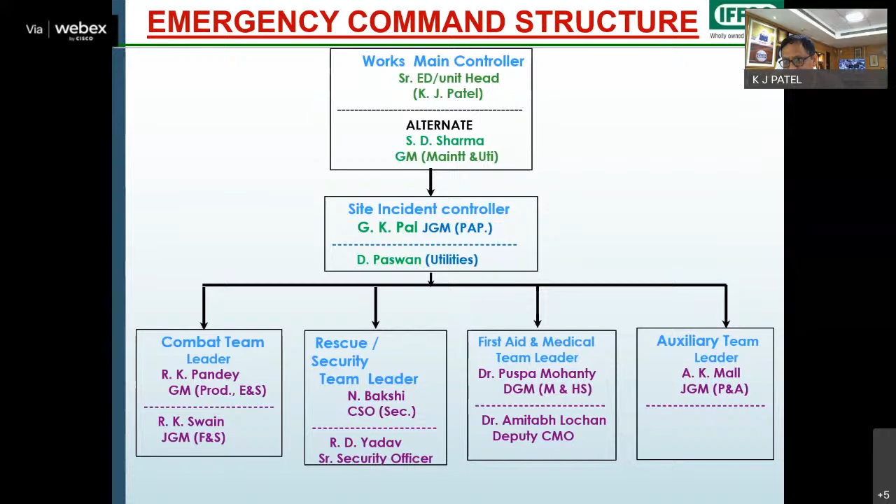On-site and off-site emergency plans are very well available with the industry. Our emergency command structures are defined, and the local as well as district crisis groups. So whenever the district crisis group meetings are conducted as per the statute, all industries get an opportunity to interact and participate, so that every day we get stronger and stronger in handling any possible disasters because of the handling of any toxic or flammable gases.

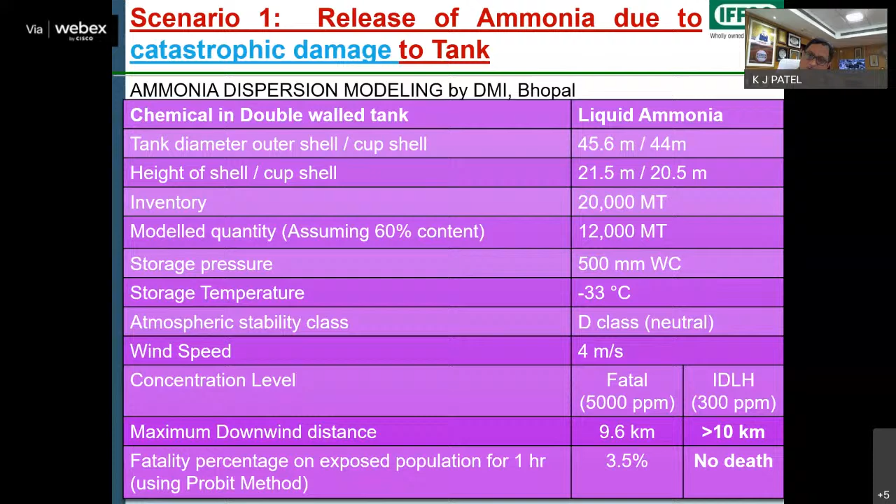Our off-site emergency management plan of the district, this is a picture of that. And there are various dispersion modelings done by DMI Bhopal. And accordingly, looking at the location of the IFFCO factory, we have also understood that within the range of 9.6 kilometers, in case there is a catastrophic failure of the tank, how much population will be there, what is to be done for that population, how to ensure that this population is evacuated, and what will be the routes for evacuation.

So for that reason, when the district crisis group has meetings, we conduct off-site mock drills. In those mock drills, the local administration authorities are also participating, and they understand the requirements of the industries to execute this kind of possible evacuation.

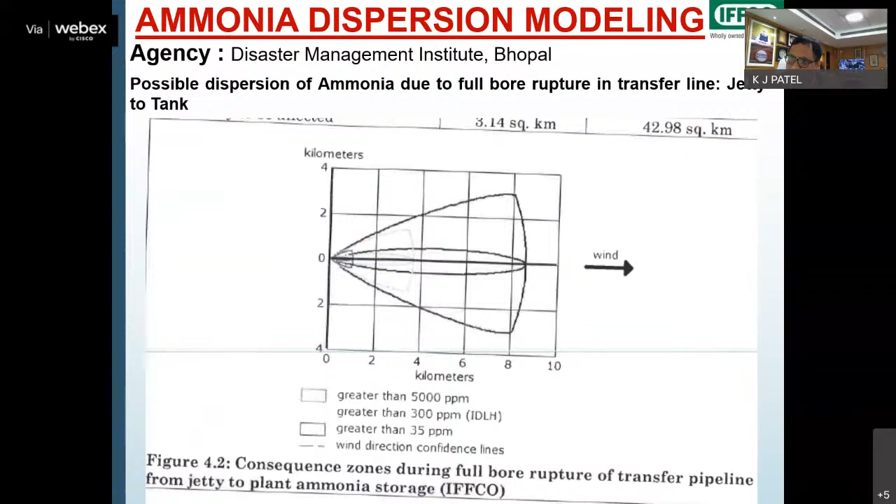Various scenarios are considered for the purpose of assessing the dispersion modeling and accordingly the possible risk to the population is assessed. One point discussed was the population in and around factories handling difficult to control or risk prone fluids or liquids. From experience, when industries are allowed to be installed or commissioned, the location is not much populated. But as time passes, business and employment opportunities make those areas densely populated, and later on they create risk for that population.

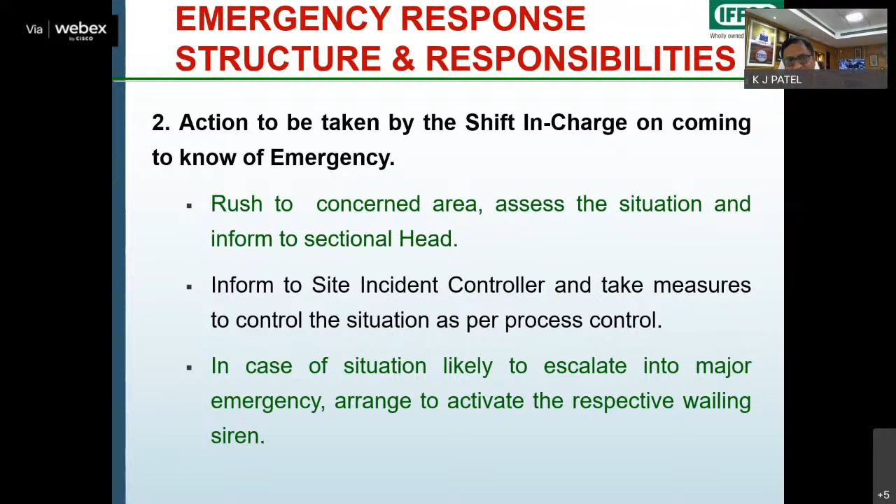The emergency response structures and responsibilities are well defined, and these are followed by incident controllers who are already identified and earmarked for our industry, and they are being taken care of.

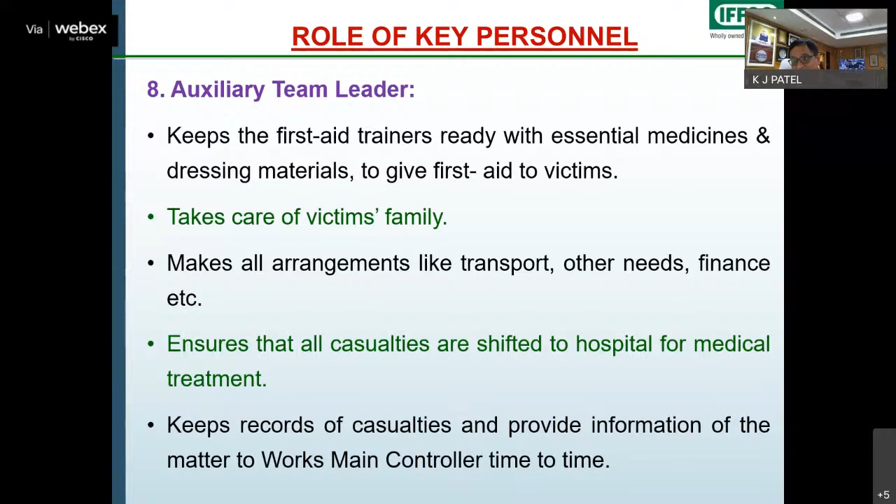The auxiliary team leaders handle communicating the requirements of the industry in case of any hazard, or if we are reaching off-site conditions beyond on-site ones. The auxiliary team leaders are normally from personnel and administration areas, who handle communication protocols with the concerned authorities. They are trained for that.

The role of individual key persons and the emergency sirens, how they will blow, what should be the siren pattern in case of fire or toxic gas release - these are very well defined and explained to the nearby population, so they understand what has happened before information reaches them from the concerned authorities and personnel.

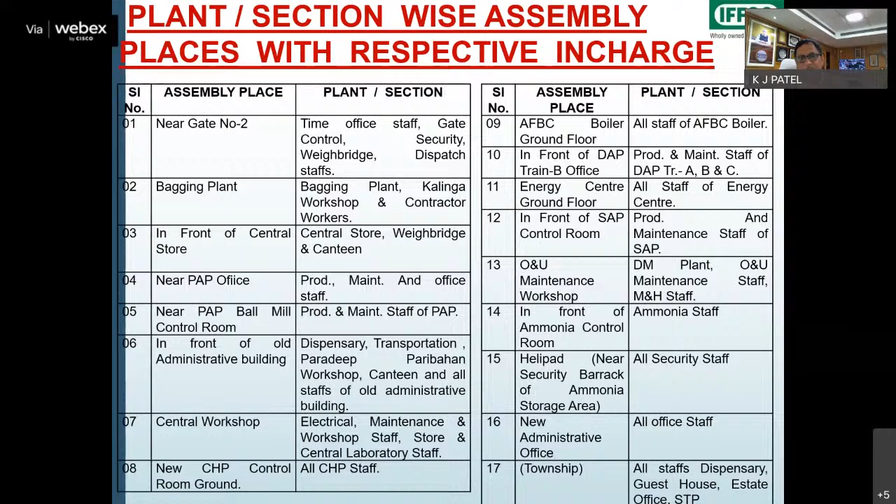There are various smoke detection systems and facilities available which pass on the message not only to the area specific operators but also to the fire control rooms.

Various on-site and off-site mock drills are also conducted from time to time, and it's a very prestigious moment for me to say that the management, the government machinery management, the authority management is happening so beautifully that the requirement of on-site or off-site emergency condition management by the industries is being monitored at all levels - starting from the disaster management authority, directorate of factories and boilers, all the way to the collectorate level or the emergency officers of the districts.

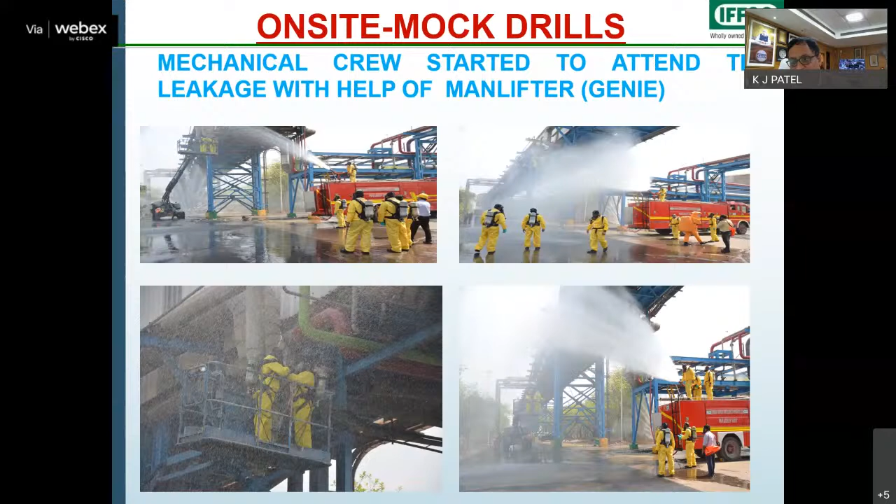So from all the levels, the awareness is there. From the industries, the awareness is there, and definitely these law imposing authorities, when they are strict, and when the industries are very well aware of the risk involved, I think we can mitigate and minimize the possibility of any disaster.

The mutual aid scheme was also discussed. We have this mutual aid scheme with our nearby major accident hazard industries like Indian Oil, Paradip Port, and Paradip Phosphates Limited. So we do take care of each other.

We do community awareness programs so that the community - not only the people in the village panchayats and other areas, but also the school children, and even the nearby industries - are made aware.

We also have directions from the state regulatory authorities that we have to adopt safety buddies in the form of small industries working in and around us, who handle chemicals like what we handle. So we do take care of them. We explain to them how to handle those liquids, because they do not always have the required facilities available at a time of need. And we provide them that assistance.

For that reason, we have established a small emergency response center - the first of its kind for the district in Odisha - where we have the facility of communication between the small industries and the major accident hazard industries, and where we are equipped to handle possible damages to the people or population because of the various liquids.